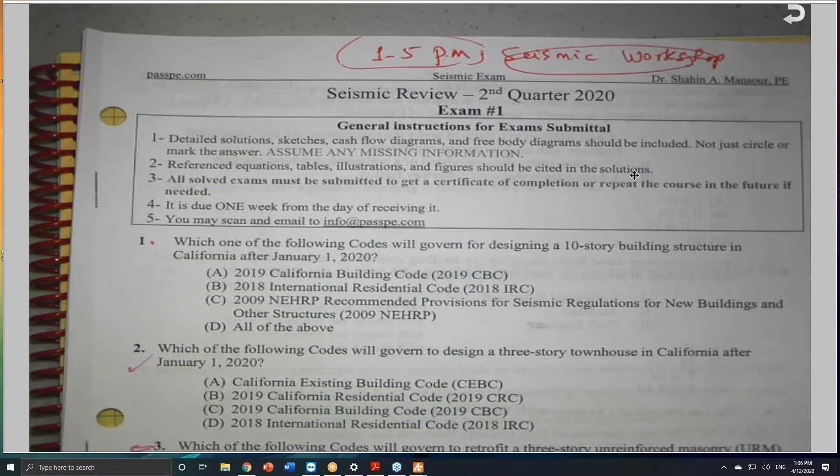So these questions are collected from my books. And as I mentioned last time, in order to get the maximum benefit for everybody, let me make sure that the system is working and all of you are here, especially the seismic group. I assume that all of you are here.

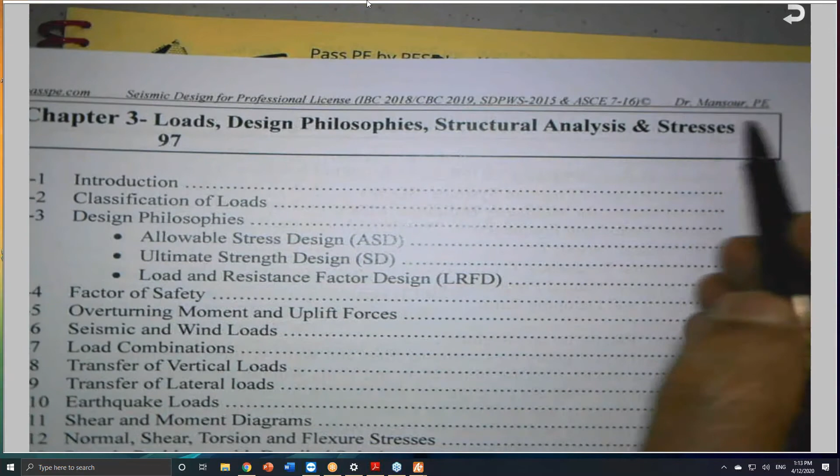Chapter 2, it's seismic legislation and the Professional Engineers Act. Chapter 3, things start to take a little bit toward the code or the seismic code. So we talked about loads, design philosophies, structure analysis and stresses.

Chapter 4, earthquakes, characteristics and basic theory. And chapter 5 is talking about some terms that we use a lot in seismic design and analysis. So I talked a little bit about the vibration theory, stiffness and rigidity. So the first 5 chapters, I call them introduction.

The heavy stuff starts from chapter 6, where we start to use a code, the ASCE 7-16 specifically, chapter 11 and chapter 12, these 2 chapters talking about seismic requirements for building structures. And after that, chapter 7, 8, 9, all the way until we hit chapter 16.

Because the current code, as you know, is the IBC, International Building Code 2018 / CBC 2019. CBC, California Building Code, came from, or is based on, IBC, the International Building Code. So either one of them. The difference between the CBC and IBC is that CBC has A chapters. For example, you'll find chapter 16 and 16A.

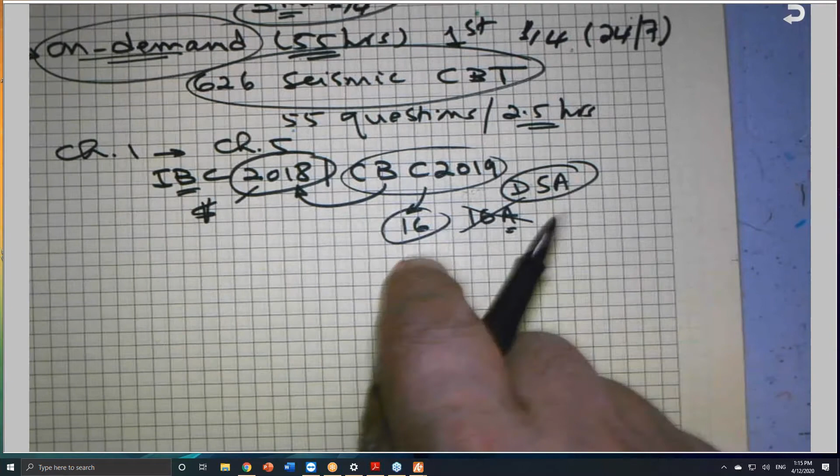and to avoid any confusion. In addition to these two codes, we have the major one, which is the ASCE 7-16. This is the core of the seismic, and you'll find the majority of the equations coming from this publication. It's a very thick document. In fact, it has 2 volumes this edition: the code itself, and after that, the commentary or the explanation of the code.

I'm sorry, probably I did something. Even though I did my best to secure it, it seems I hit something. Let me bring the camera back again, because it seems the camera is disconnected. Sorry for that. Let me try again one more time. Hopefully this time it will recognize the software. Now it should work. I hope so. Forgive me. Okay, here we go. Sorry for this technical difficulty.

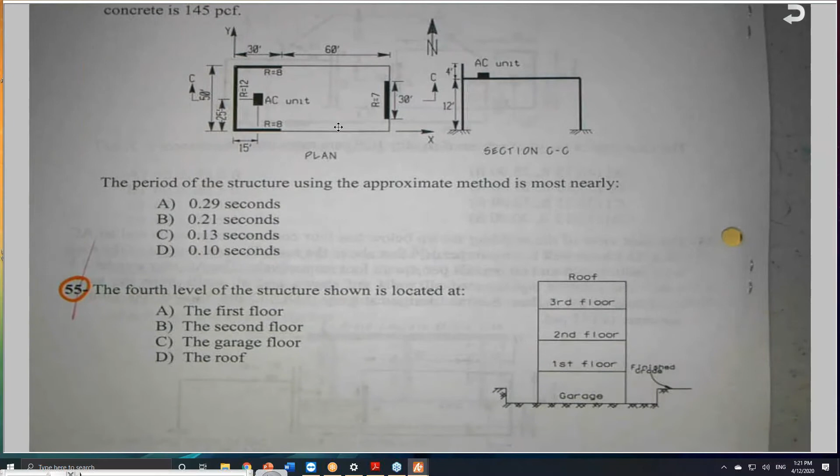So if we go to the 55 questions here, I will start with question number 55, and I'll go backward, because there are some problems at the end I need you to be aware of. Especially they need a lot of calculations, and I need you to be familiar with these calculations. After that, we'll go to the rest of the problems. As I announced last time, I hope you get a chance to watch the recording of chapters 1 through 5, so you can ask me any questions related to them.

So problem number 55 gives you a drawing like this, which I sent this morning, so I hope everybody got a chance to print it. The 4th level of the structure shown is located... In the code, there are 3 important definitions I need you to be aware of, listed in chapter 11 of the ASCE 7, and I include them in my book. What is a base, what is a level, and what is a story?

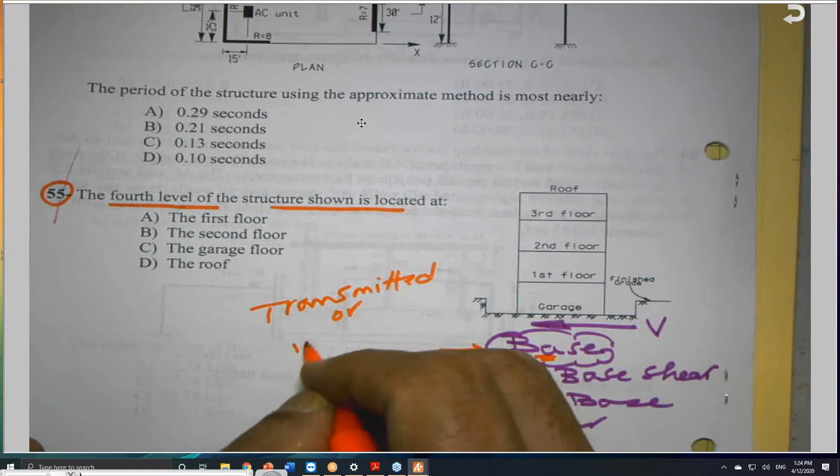So what is the definition of a base? Whether V will be coming from this direction or this direction is not the point. So the base is defined as the level at which the seismic force will be transmitted or imparted to the structure. Transmitted or imparted to the structure.

So, and this definition is given, I'll show it to you in just a minute. So it is the level at which the seismic force is imparted or transmitted. So when the ground starts to shake under this structure, a seismic force will be transmitted or imparted to it, and this in our case is going to be the base. But he's asking for the level. So

the definition for the base: this is where the seismic force is imparted to or transmitted to the structure. This is the definition of the base.

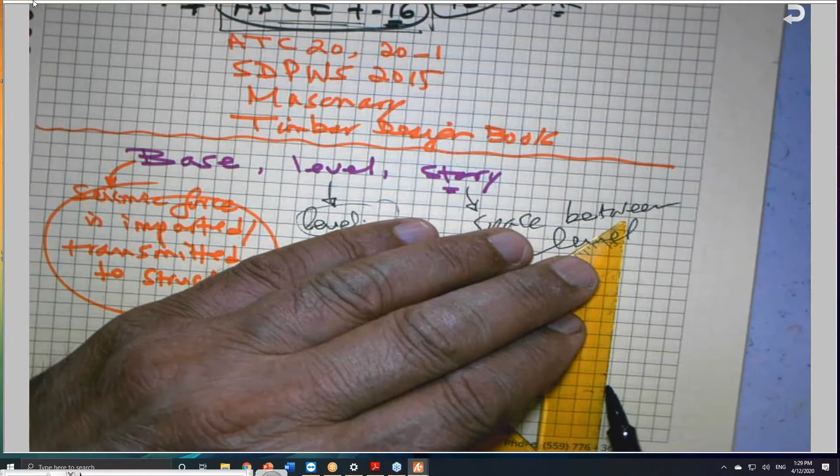So when we come to chapter 6 and talk about the distribution of the seismic force, assuming that this is a given structure, and the seismic base shear V has been determined, we know V is equal C sub S times W. C sub S is the seismic response coefficient, and we have some equations for that we'll see later on. And W is the seismic dead load.

So this V, we can distribute among the levels as F1, F2, and F3. This distribution is done according to an equation we are going to see. And these are the forces at level 1, level 2, and level 3. Obviously, this also has 3 stories: story 1, story 2, and story 3. And this is going to be the base.

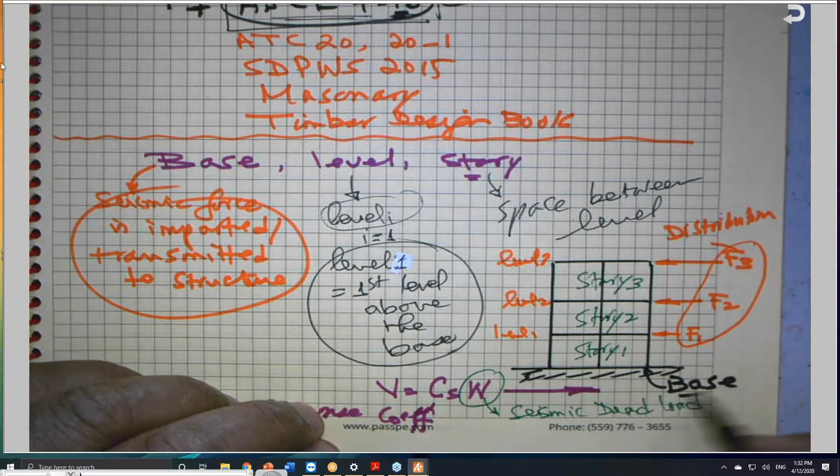So going back to problem 55, sorry, I'm trying to put in some information that we're going to talk about in depth later on. So the fourth level is the first floor, second, third, or the roof? Obviously, level 4, the fourth level, is the roof. And this is the answer here.

So this is the answer for this one here. At the beginning of my book, under glossary and definitions, on page 51 of the textbook, you will find all the definitions that I believe you need. I gathered these from different sources, including ASCE 7-16, chapter 11.

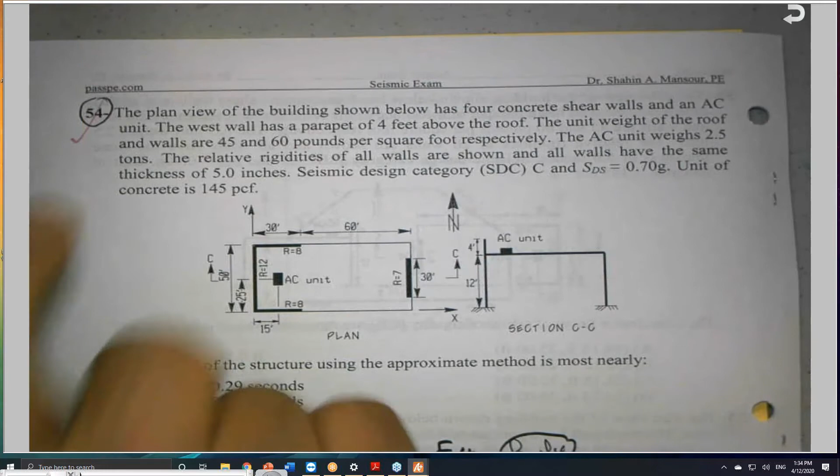The plan view of the building shown below has 4 concrete shear walls and an AC unit. This is a plan view, and this is a cross section, when you cut it, section CC. These are the walls, and we have an extension here. We call it a parapet. In chapter 7, we talked about non-structural components. So a parapet is a non-structural component.

So dimensions are given. The west wall has a parapet of 4 feet, which is an extension beyond the roof. And the parapet, as I told you, we classify as a non-structural component. We cover them in chapter 7 of my book, the textbook, which is based on chapter 13 of the ASCE 7.

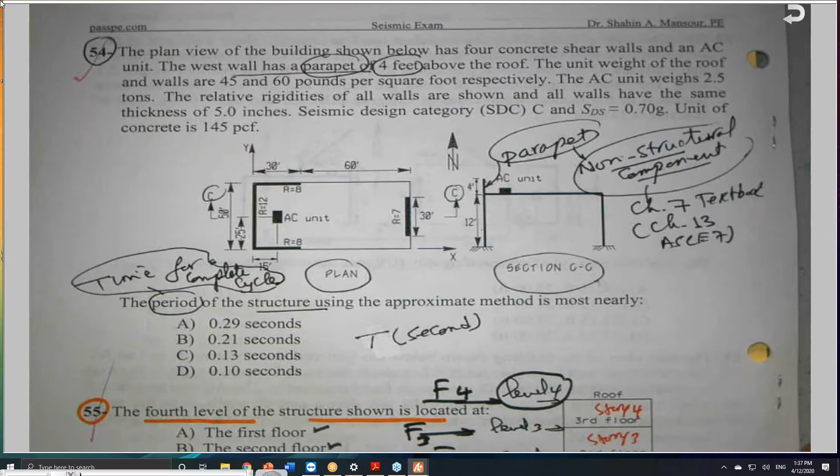T is the period, normally expressed in seconds. The period is defined as the time for a complete cycle of oscillation. So the period T is the time required for a complete cycle of oscillation.

We're going to see an equation in chapter 4. T is equal to 2 pi square root of W divided by K. W is this weight, W is equal to mg. Let me put it in terms of mass first. So it is mass over K, and I will define K in just a second. From W equals mg, the mass is equal to W divided by g. So the period T is equal to 2 pi square root of W divided by Kg.

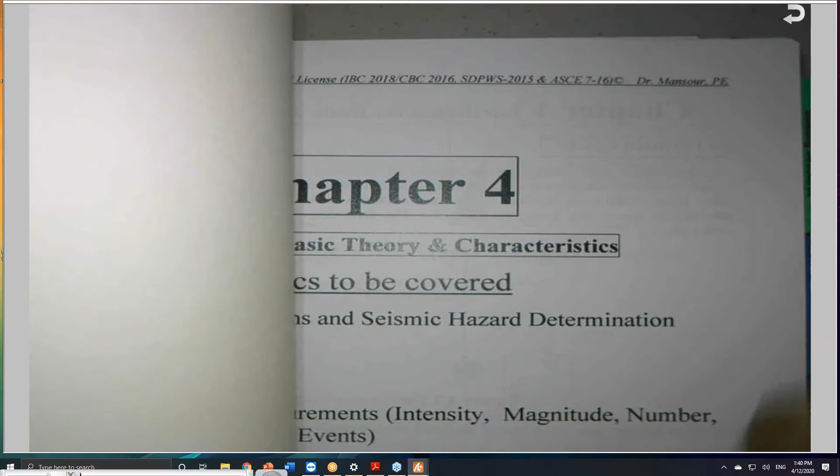If you have the book with you, in chapter 5 you will find this given. Here it is, equation 5-2. This is the natural period of the building, the time for a complete cycle of oscillation of a single degree of freedom system.

Two pi square root of W over g times K, or in terms of M, where M is the mass. g is the gravity acceleration, which is 32.2 feet per second squared, or 9.81 meters per second squared. I already gave these to you in the glossary and definitions. You will find g there as 9.81, or 9.80 if you like to call it that way.

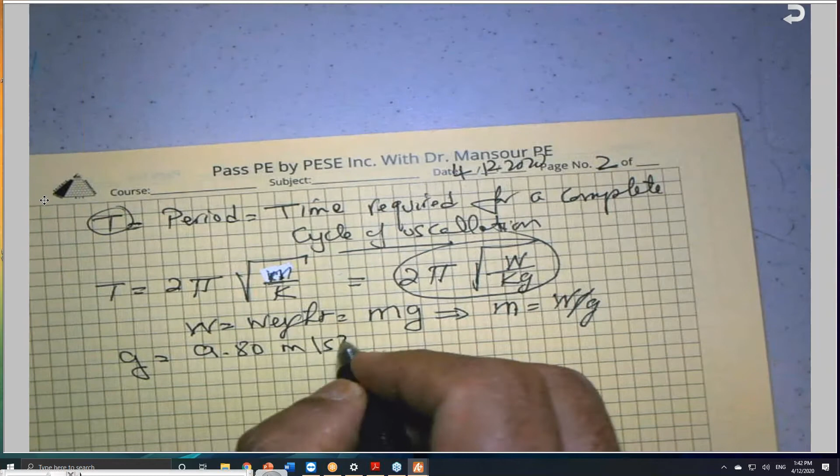1 meter equals 100 centimeters, so 9.81 gives you about 980 centimeters per second squared. The inches per second squared value comes from 32.2 times 12. So g is 9.80 meters per second squared, or 980 centimeters per second squared. We need this; in chapter 6 there are problems where g is required, 32.2 feet per second squared, or converted to inches, 32.2 times 12.

If you multiply 32.2 times 12, it will give you the number we just saw together, which is 386.4 inches per second squared.

So the period of the structure, T, is very important. So the T, and this is in physics, the period T is equal to 2 pi square root of M over K. K is stiffness.

Stiffness, by definition, is the force required to produce a unit displacement. A definition, K, and we remember this from school also, when we have the coil spring in physics, 4A or 4B or whatever the number, we determine the spring constant, we apply a force, P,

And here it is also in chapter 5. Leave chapter 5 open at the same location. But I need you to study it to a degree or to the level. Here it is, stiffness K. It is on page 149 of the textbook. Page 149.

And the g I just talked about, here it is 32.2 or 386.4 inch or 9.81 meter per second square. If you'd like to add here, it is 981 or 980, that depends how many decimal places, centimeter per second square. So you have all the units here. So the spring stiffness K is P over delta.

So I did not forget problem number 54 yet. I am looking for the period. But he said using the approximate method. At the beginning of chapter 6, we're going to see this. But let me just focus on one thing. This period here, as given in physics textbooks, is for a single degree of freedom system, which is normally how we model our structures.

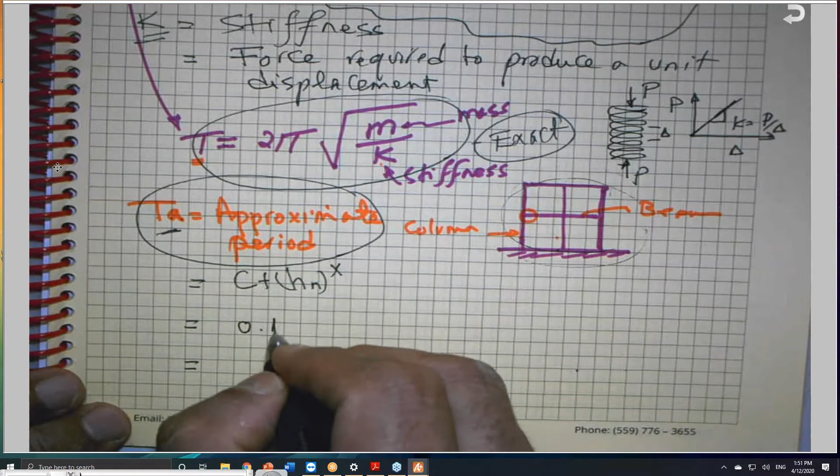After that, I can revise my design to get the preliminary sizes, to get the mass and the stiffness, and do this, the exact solution. And there is a relationship between T and T sub A. We're going to see it in chapter 6. So one of the equations is C sub T times h sub n to the power x. And one equation is 0.1 N, where N is the number of stories.

And in the first equation, C sub T is a certain coefficient. h sub n is the height of the structure to level n above the base. And for x and C sub T, they give us a table. This table is given in the code. And I took the table and developed some values for you to try to make it easy for you.

And this is 12.8-8. And the third equation is T sub A is equal to C sub Q, they introduced this the first time, over the square root of C sub W times H sub N. And they give us two values for C sub Q. C sub Q is equal to 0.0019 if we are dealing with feet, or C sub Q is equal to 0.00058 if we are dealing with SI units.

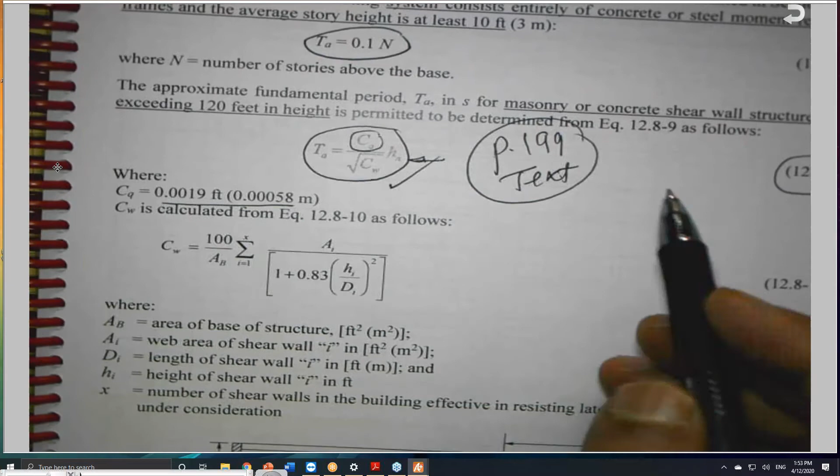And this is the little bit complicated equation, 12.8-9. And here are the values. And the C sub W is given by this equation. And I explain C sub W in the form of a diagram or a figure like this. And to the best of my knowledge, I am the only one who did that. Maybe somebody else has a book talking about this, because this is a little bit tricky. And I don't know if I have some problems.

I believe I have some problems to explain what these terminologies are, because it's not given in the code. I need to check the new code. I was thinking maybe in the commentary, since they came up with the new book, they have some kind of illustration. But I read a paper way back, and I got the idea from a paper, by the way. I did not invent it. I cannot claim that. It's just a matter of illustrating the concept of the equation itself.

So going back to the problem, we should know when we can use this equation, C sub T H sub n to the power x, when we can use 0.1 N, and when we can use this. Because there are certain requirements, and I will talk about it next time, okay? But this is just to solve the problem; next time in chapter 6, we are going to talk about this.

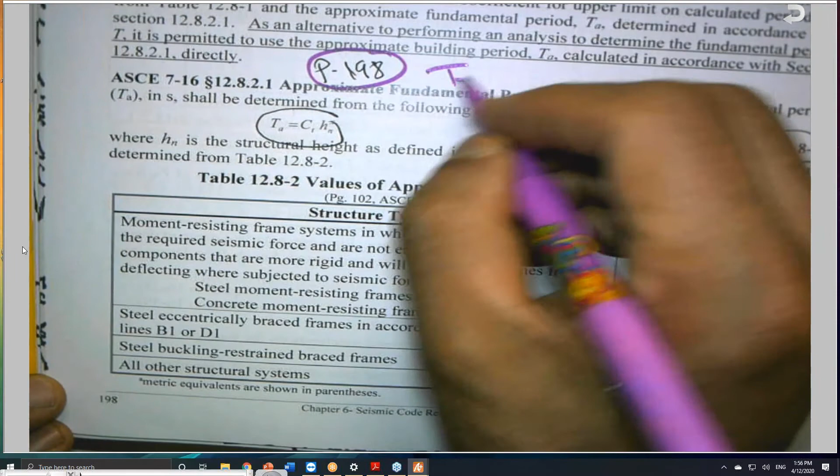So this is a bearing wall system, concrete shear walls. So when you go to the table that has the values of C sub T and X, as shown on page 198 of my textbook, you will find that we have one column for C sub T and one column for X. And for C sub T, you will find we have numbers here and numbers between parentheses like this. The numbers in the parentheses are the metric equivalents. And here are 4 entries, 1, 2, 3, and 4.

Here, moment resisting frame systems, which we don't have in our case. This is a bearing wall system. It's not a moment frame, it's not a building frame, it's not an eccentrically braced frame, it's not steel buckling restrained braced frames. It's under other structures. So it is this and this.

So in this case, if I plug in these numbers, where C sub T is 0.02, H sub n is 12 feet, and the X component is 0.75, and you do this calculation, you will get the period of the structure using the approximate method: 12 to the power 0.75 times 0.02. I got 0.1289 seconds, which I can approximate as 0.13 seconds. And this is why I will select answer C.

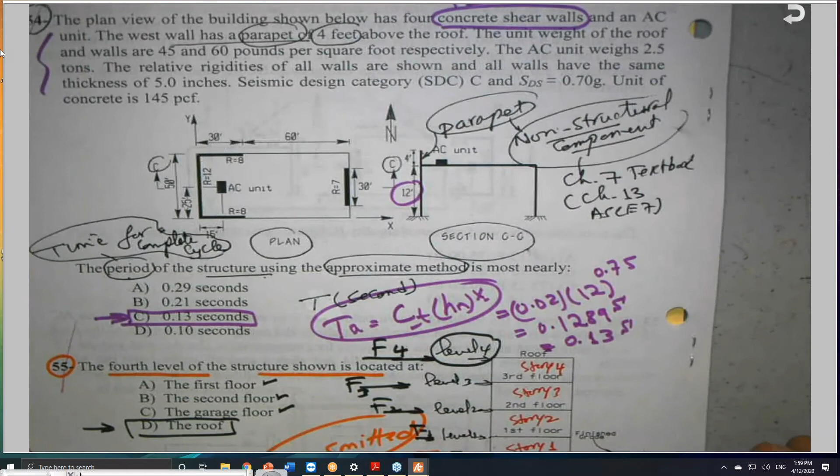Make sense? Good. I will be glad to scan these things and send them to you. I know my Egyptian handwriting. I don't know if you like it, but at least it gives you an idea of what I'm talking about. Okay, go to the previous page.

Problem number 53. The plan view of a building shown below has 4 concrete shear walls. So it is a bearing wall system, because as you know, in the seismic, we should know what system we are talking about, because we need to get the proper value of the R or C sub T, or so this is 3.

So we call it lateral force resisting system. A lateral force resisting system. Lateral force resisting system. And the lateral force resisting system, this is the system that is responsible to take the seismic force, which is the lateral force, to bring it down to the foundation of the structure.

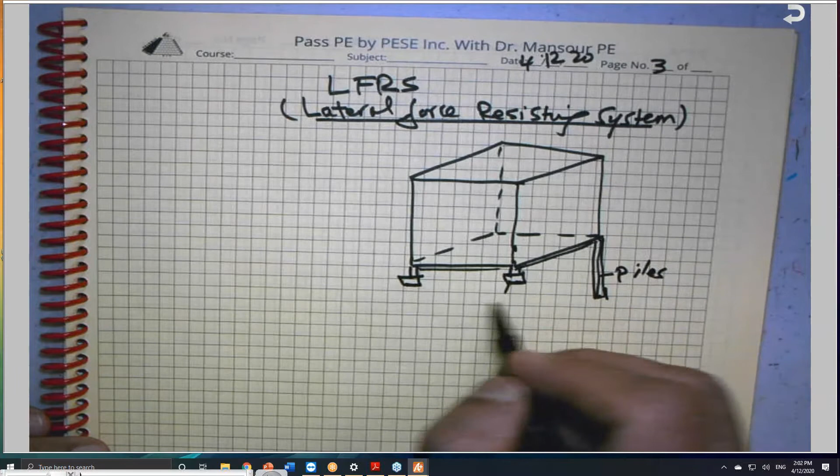This is a building or a structure in general. So I'm using a box like this. And there are some foundations here. Maybe it could be footings or maybe piles. It depends on the height of the building. This could be very long or could be just a footing, whatever the number of stories of this structure.

So basically, there is a seismic force. And this is a lateral force. We are going to see it later on, by the way, in chapter 9 and chapter 10. And you are going to see a problem just shortly about this, by the way. A lateral force at each level. It could be a distributed load or a concentrated load. Chapter 9 and 10, you will find a drawing like this. Maybe I need to get this seismic force, which is a lateral force. These are the seismic lateral force.

I needed to get it from its point of application all the way to go through the roof, for example, which we call it diaphragm. Take it all the way down, until it comes to the footings or the foundation in general, and go to the supporting soil. This is why we need to know the type of the soil very well.

This is why they came up with the soil type A, and soil type B, and soil type C, and soil type D, and D default right now. They have 2 Ds. D based on testing, and D by default. If we assume it to be D, the code has a little bit of special requirement this time. And E and F. Those are the 6 types. A, B, C, D, E, F. A being the best soil. This is the best, which is hard rock. This is the best. And this is the worst soil.

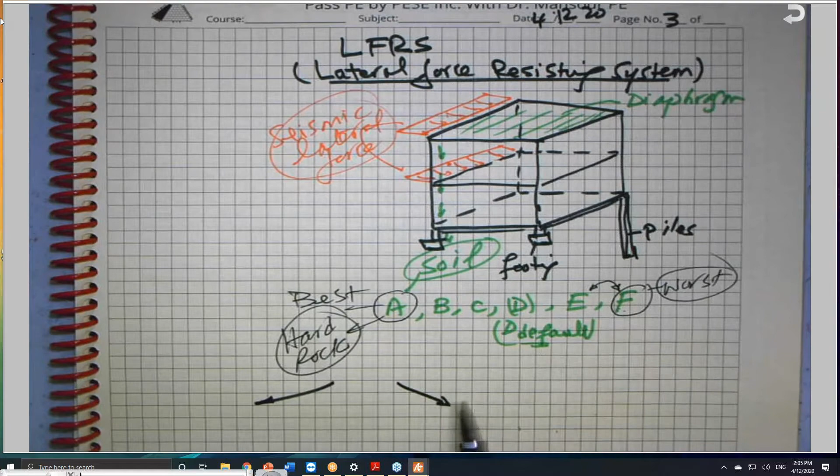lateral force resisting system. So the lateral force resisting system, in order to help us, they came up with a very nice way to describe this, and they broke it down, or I broke it down according to them, according to the current code: a bearing wall system. Wall systems, let us make it plural. So it means that the walls are responsible to carry the gravity load and the lateral load, because here we have a gravity load, by the way.

We have load coming down, which is the gravity load, but we don't design for it. We are not concerned about the gravity load in this course. So we have a gravity load and we have a lateral force or lateral load. We are concerned about this here, which is the earthquake force, not the wind load. The E is the earthquake force. Earthquake lateral force.

So the first one is a bearing wall system, or the bearing wall systems. The second one is building frame systems. Frame systems. And the following one is the moment frames. Moment frames.

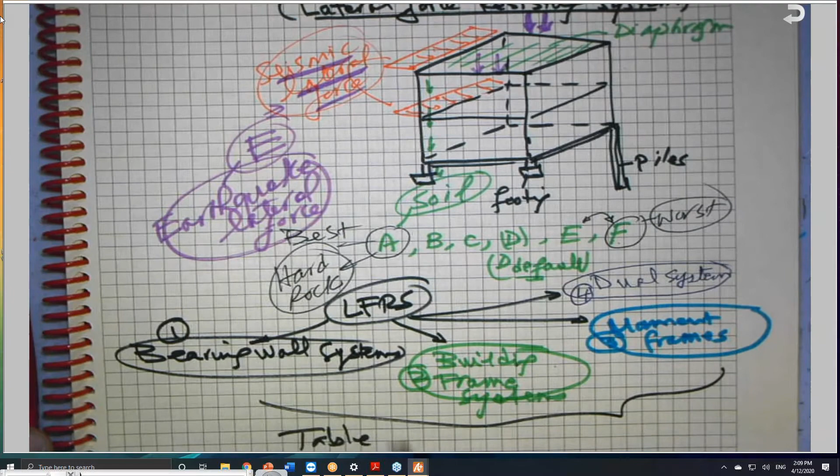Here you will find there is a table in the ASCE, table 12.2-1. This is the largest or the biggest table. It has all these systems, and they broke it down into subsystems, about 83 systems, if I count them correctly, I believe. But you have it and you can count them. Let me know if it's 83 systems.

And on the exam, you need to know exactly which system they are talking about, because there are some values we are going to get from this table. We can get the R, we can get the omega sub O, and we can get what is known as the C sub D, deflection amplification factor, and R, the response modification coefficient, and omega sub O.

Let me see, I forgot. Over strength factor, what it is. Forgive me, team. I didn't sleep very well last night.

So this is the over strength factor, this is the deflection amplification factor, and the R, response modification coefficient.

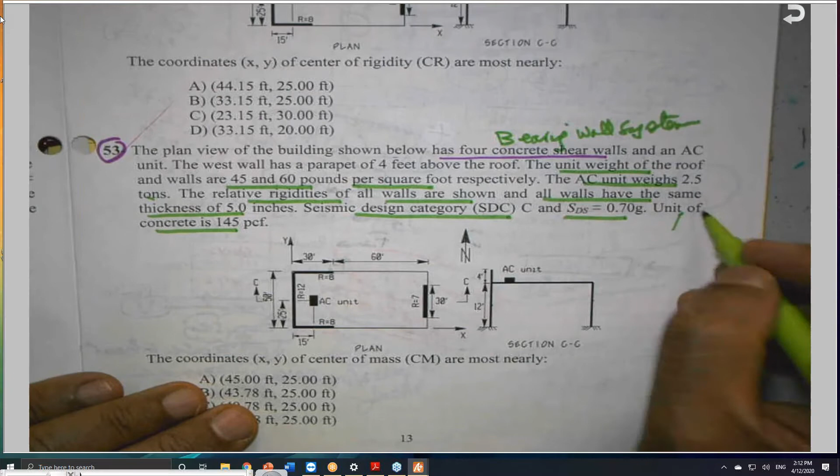The unit weights of the roof are given to be 45 and 60 pounds per square foot. And the AC unit is 2.5 tons. We have an AC unit here. The relative rigidity of all walls is shown. And all walls have the same thickness, which is 5 inches. The seismic design category is C, and the SDS is 0.7 G. And the unit weight of concrete, which is gamma concrete.

And the question is, what are the X and Y coordinates of the center of mass of this building? We have coordinate system X and Y. So this is the origin here. This is O. He has to give you the reference. So he's asking where the center of mass is. This is a plan view. The center of mass is somewhere here. CM.

He's asking for this dimension from here to here, which we'll call YCM, and this distance from here to here, which is XCM. And we need to know the center of mass, because this is where the seismic force will go through. The base shear V goes through the center of mass.

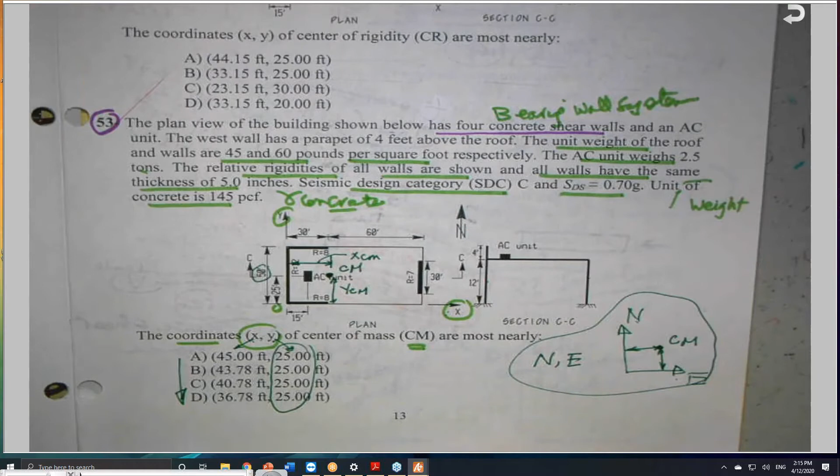Sometimes they use the northern and the eastern. So he will tell you, okay, this is the northern direction, and this is the eastern direction, and the center of mass will be somewhere here for whatever structure it is. So he can give you the coordinates of the center of mass based on the northern and the eastern. Here he put it as x and y because he gave me x and y. So pay attention. Also, I saw some problems that could be this way, where I used the northern and the eastern also. Yes, I used it.

So we need to determine the CM, the center of mass. Where is center of mass? I cannot really, by the process of elimination, eliminate any of these because all of them are 25, 25, 25, 25. That means that he is forcing me to calculate the value of x sub CM, x of the center of mass. If I'm able to get x, for sure I will pick the right answer.

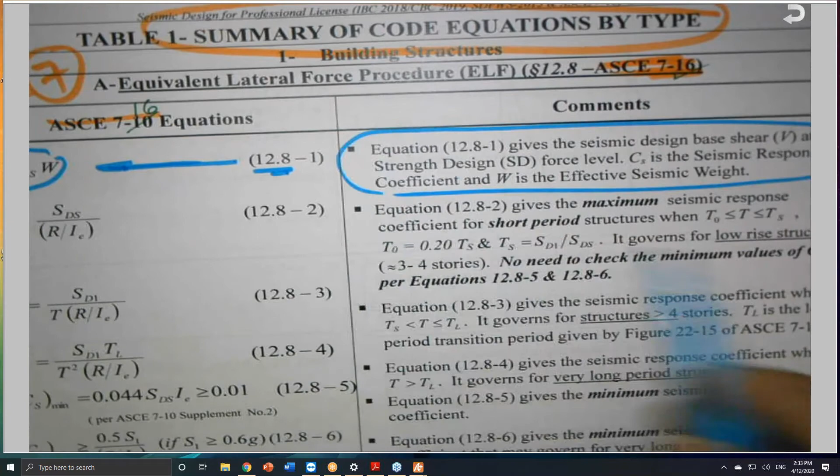And this summary is broken down into code equations and non-code equations. So on page 7, for example, of this summary of code equations, like the equation I wrote today that V is equal to C sub S times W, I give the name of the equation, when can we use it, and what are the parameters needed for this equation, and so on.

And after I finished the summary of the code equations, I constructed another table, which I call table 2 on page 13, summary of non-code equations. For example, the center of mass and the center of rigidity are among those non-code equations because they are expecting that we will know how to determine that. Here it is, equation 22 and equation 23 for the center of mass and the center of rigidity.

So nobody will ask you to memorize equations, but we need to know where they are located, when we can use them, and what are the parameters. So I have XCR and YCR for the center of rigidity, and XCM, the one we are going to use right now, and YCM. In our case, YCM by inspection is 25 feet due to symmetry. And I will explain this one more time. So these are the equations that I need you to be aware of, where they are located and how we can use them. So what is the story of the center of mass and the center of rigidity?

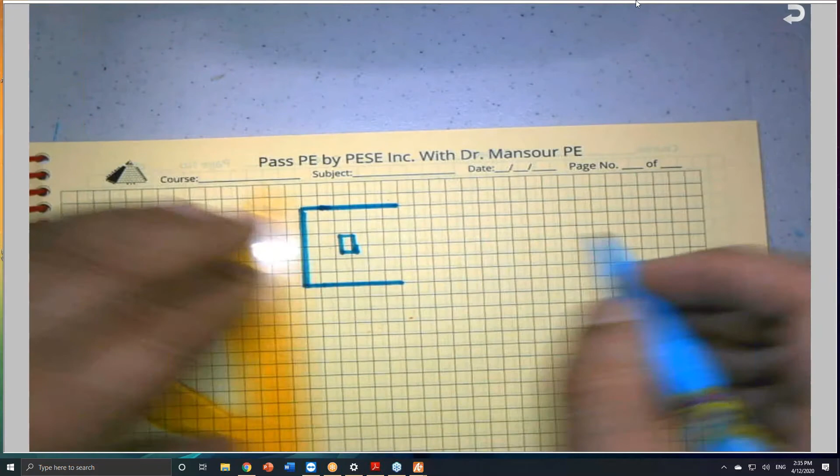Center of mass and center of rigidity are extremely important as far as their location or determination, because if you look at any building, a plan view like our building for the sample problem here, you will find that we have a wall here, and there is another wall here. Let me make it a little bit bigger. And we have another wall here. And we have the AC unit here. And we have another wall here, which is a short wall.

And the rest are openings. And this is what you see here, but I drew it a little bit bigger. So I said that the center of mass is somewhere here. And we defined that this is X and this is Y. And this dimension is 50 feet. So due to symmetry, the center of mass is halfway of the 50 feet.

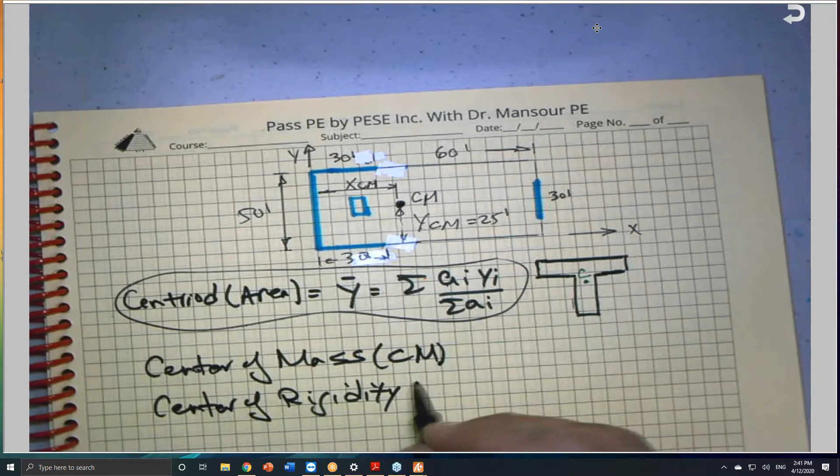So the centroid, with the centroidal axis, C. What we did, we took the same equation to calculate the center of mass location, CM, and the center of rigidity, CR. Center of mass and center of rigidity, these two based on this equation.

But when we're talking about area, we use A. When we determine center of mass, we are using M. When we calculate center of rigidity, we are using R. So for this problem here, the XCM, based on the equation I showed to you, which is equation number 23, XCM, in parallel to this, is the sum of the Mi Xi over the sum of the Mi.

And this is equation 23. Obviously, I give it a number because there is no equivalent equation in the code. So this is equation number 23 on page 16 of the textbook. So far, so good. Let us do the math. And I'm sure that you are going to have some questions after we finish, but this is the purpose of this exercise.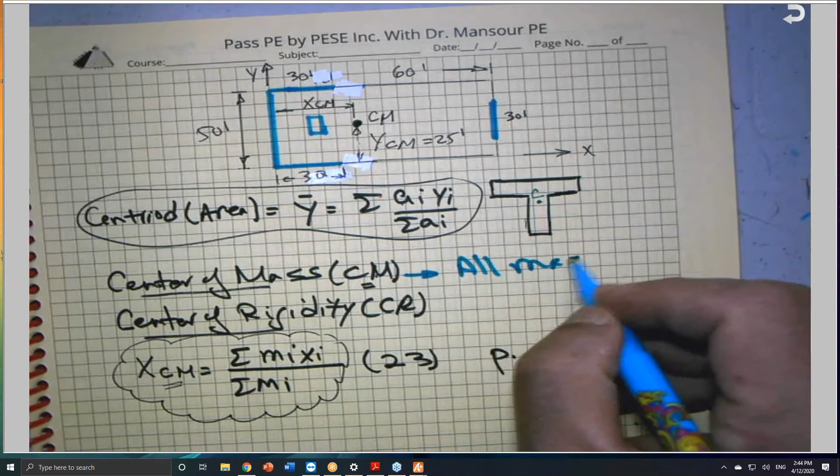The biggest problem with the center of mass calculations, you may forget one of the masses. You may. But when we calculate the center of mass, if you remember the 7 rules in chapter 7 and chapter 5, all masses should be used to determine the location of center of mass. But the center of rigidity, no. Not all the walls, as we are going to see shortly. Certain walls, not all the walls, will be part of the center of rigidity calculations. Sometimes in certain configurations, all walls, but not necessarily. But this is a rule, always.

So what do we have? We have the roof. So I will take each mass multiplied by its distance, where xi is the distance from the centroid of the element to the y-axis. So the first one is, let me put it here. In a problem like that, I know it is very lengthy, and I don't know if they can ask you this or not on the exam. Maybe a little bit more simplified one, but I will count them.

The roof is one mass. I have walls: 1, 2, 3, 4. I have 4 walls. I have the AC unit. So a total of 1 plus 4 is 5, and the AC is 6. So 6 components must be shown here. If I miss one, that means that I did something wrong. Are you ready? Let's start with the roof.

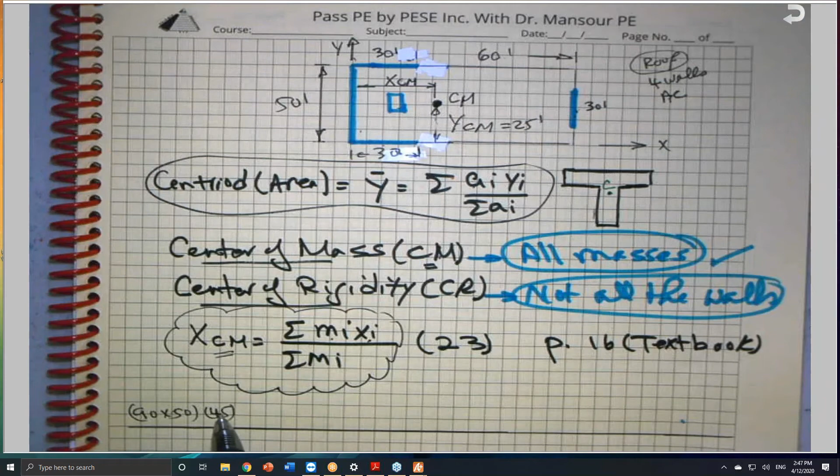The roof is 90 by 50. This is the surface area. It is 90 by 50. How thick is the roof? He gives the roof directly. The roof has a weight of 45 pounds per square foot. So 90 by 50 gives you the surface area, times the unit weight. This is the mass by itself.

But the roof has a centroid, and this is 90. So the centroid of the roof is halfway, which is 45 and 45. So I will multiply this. This is the xi, which is 45 feet.

So far, so good. A plus. So I finished 1 out of 7. Out of 6, sorry. I will take this wall. This wall, it does have a 30 feet wide. And this is also, I can make 50 feet times. The height is 12 feet. So this is the surface area. Times the unit weight for the wall, which is 60 pounds per square foot. How far from the centroid of the wall to my reference axis here is 90 feet.

I finished wall number 1. So I would say plus. And the roof, plus. A plus. For 1 wall. These 2 walls are symmetrical, by the way, or they are the same. I can say 2 walls times 30 feet times 12 feet times 60. How far from the centroid of this wall to this here is 15 feet. And I multiplied by 2. That means that I have 1 and 2 walls here. So this wall is done and this wall is done.

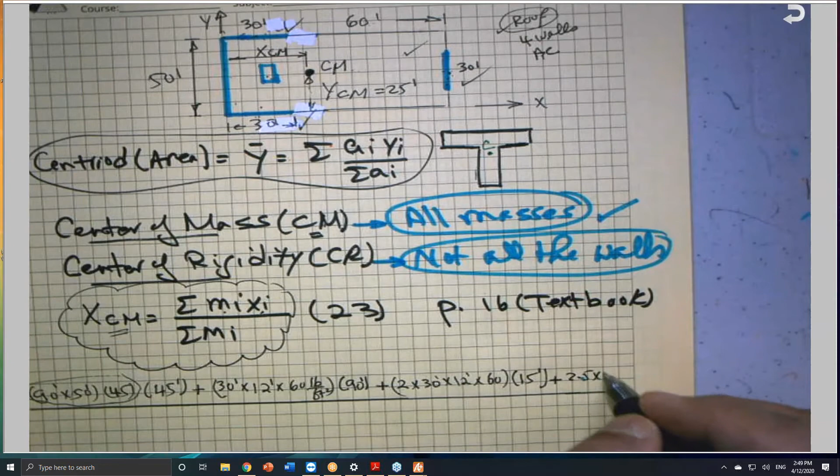I will hit the AC unit. It is 2.5 tons. So it is 2.5 times 2,000 pounds per ton, times the distance from the centroid of the AC to the y-axis, which is given as 15 feet. So I am done with the AC.

I put the numerator. You can add the denominator immediately, by the way, because the denominator is a mass. So you can say this is 90 times 50 times 45. This is mass number 1, a plus. I have 30 times 12 times 60. A plus. 2 walls, 30 times 12 times 60. A plus. 2.5 tons times 2,000 pounds per ton.

1 wall to go, which is this wall here, which is 50 feet. Sorry, the numerator here, I will continue like this. So I will say a plus here. It is 50 feet times, the height here is 16 because of the parapet, times the unit weight, which is 45. Sorry, no, 60. The 45 was for the roof. So 60. Which is this one here. Multiplied by how much? Multiplied by 0. But don't forget to put it in the denominator. Even multiplied by 0, but still by 60.

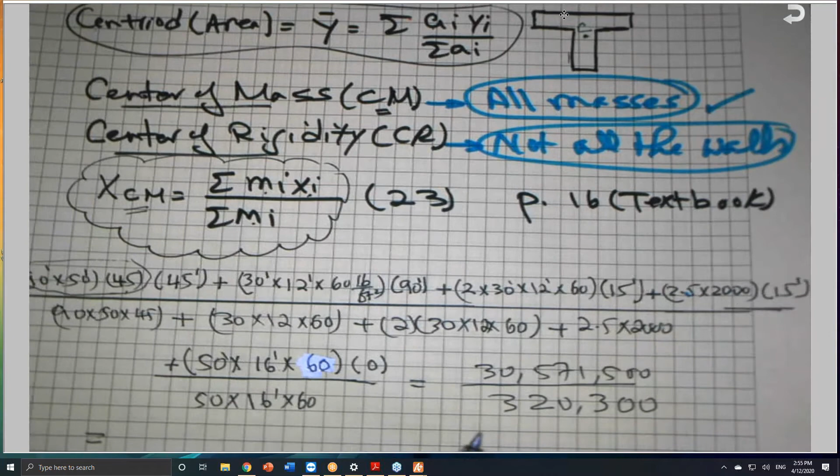Okay. I have the solution. I can show it to you, but I wanted to do it with you. This number most likely is wrong. Let me do it one more time.

I get this number here, 11,779,500. So if you do this, divided by 320,300, I got 36.78 feet. I hope that you agree with me. Anybody got the same number? 36? I need either yes or no. Anybody can support me or correct me, unless you are doing the calculations.

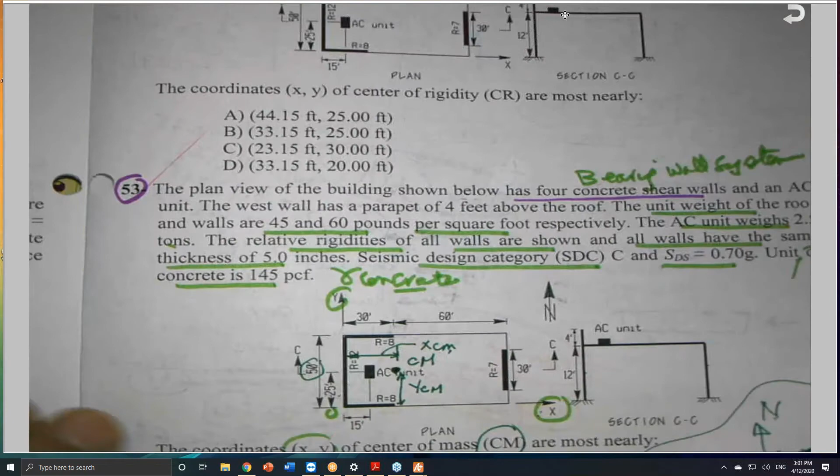So the center of mass, and I have many problems, you will find that the mistakes that we might make, we probably don't do the math right. I did the first one, a number came out that does not make any sense. And after that, I did it again, and it turned out to be correct. Don't forget that some members will be multiplied by 0. Don't forget to count the number of elements. Don't forget that all the masses will be part of it. Make sense?

Okay, so this is problem number 53. Sorry, it took long, but at least we understand. And if you have a center of mass calculation, try to be careful with the common mistakes, as I told you, that we make: forgetting one of the walls, doing the math, not taking the right density or the right unit weight. And as I told you, if you go to page 626, problem number 22, you will find a problem similar to this.

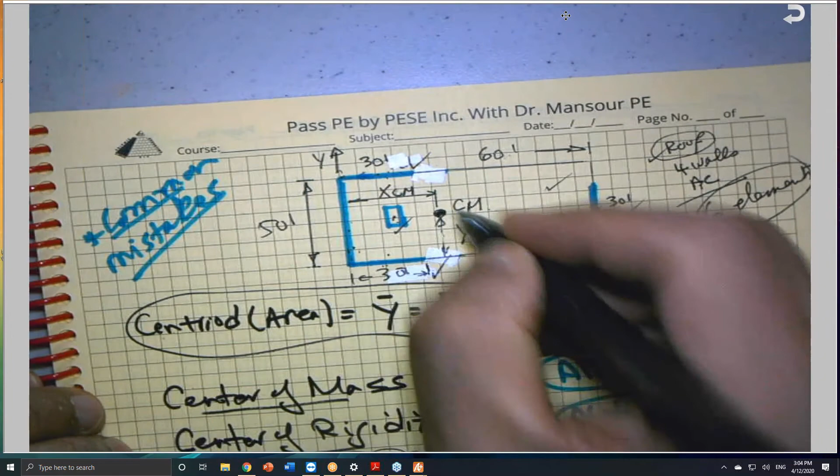Before I leave the center of mass, as you can see, the distance 36.78, the one we got, here it is. This is the distance. The whole distance is 90 feet, as you can see from here. The center of mass is closer to the concentration of the mass. The distance from here to here is only 36.78, more than 1/3 of the entire distance, because we have an AC unit here, we have walls here, but we have an individual wall far away from the concentration of the mass. This is why the center of mass is closer to the concentration of the mass.

This is also true for the centroid of an area. When I covered this, I explained that if the area is changed, this is the flange, and this is the web. If the area of the flange increases, the centroid will move up. It will get closer to the concentration of the area. And this is true for the concentration of the mass and the concentration of the rigidities.

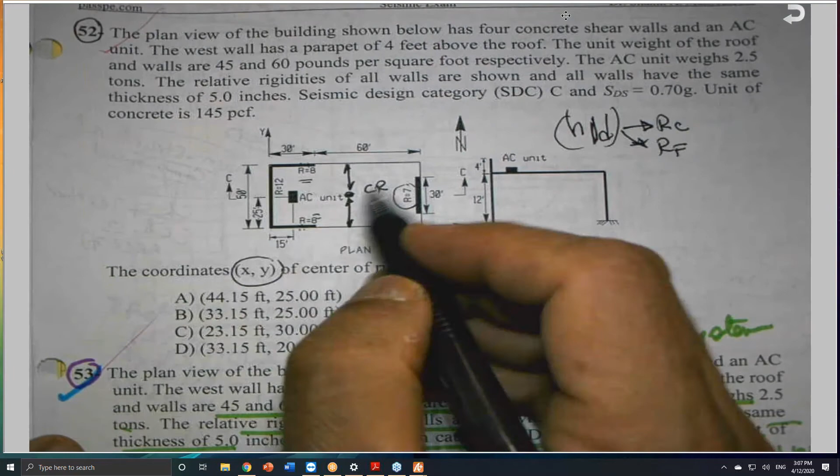So due to symmetry, I'm expecting the center of rigidity, CR, to be halfway between this wall and this wall, because the center of rigidity moves up and down in relation to the relative rigidity of these two walls only, and moves right or left in relation to the rigidity of this wall and this wall. In fact, it will be closer to this wall than this wall. So for sure, YCR must be 25 feet, which is half of this. So I can get rid of this. Here he is nice. This is because of the symmetry. Always look for symmetrical situations.

So what I need right now is the X center of rigidity. And this is very easy, one simple equation. I will sum moments about Y, or I can say XCR is equal to what? Here, not all the walls. For center of mass, we use all the walls and the AC. Here, only certain walls, this wall and this wall. The other walls will not participate in determining the center of rigidity location in the X direction. So this is 12 times 0, because I'm summing moments here, divided by 12, because the center of rigidity is the sum of Ri xi divided by the sum of Ri. I replace the letter A for area with mass, or with R if I'm talking about rigidity.

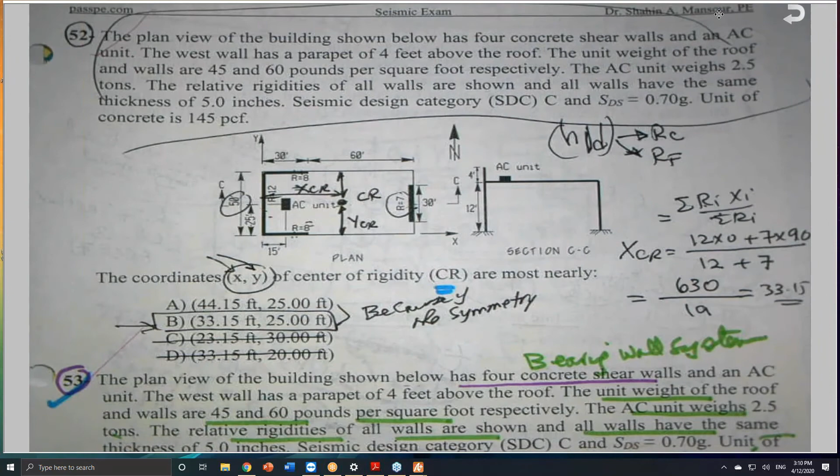Bingo, here it is. The answer is B. So on the exam, if you are getting close, you have only 1 minute left, and you have a situation like this, and he gives you lengthy information and is asking about the coordinates. Sometimes they ask only for one coordinate, by the way. Sometimes they ask for two coordinates. Be careful what they are asking for. They might ask for one coordinate, and sometimes they ask for two coordinates.

So by the process of elimination, I can eliminate answers C and D, as I told you, due to symmetry. Please remember this word, symmetry. Let me write it down here, so when you get my notes, symmetry. For the center of mass and the center of rigidity, if there is any symmetrical certain number of walls, I try to get the benefit of this property. So I have two answers left. Both of them are 25, because I know it's 25. And I have 44.15 and 33.15.

And you have only 30 seconds or 1 minute, and this calculation shouldn't take more than a minute or so, assuming that you remember the equation. And where is the equation? But at least you are 50-50, or you can proportion 12 with respect to 7. Okay, so this is the way also we do it, 12 over 19, in fact, and 90 times, but you need the opposite one, so it is 90 minus. Yeah, I got 33.15. So you can proportion that.

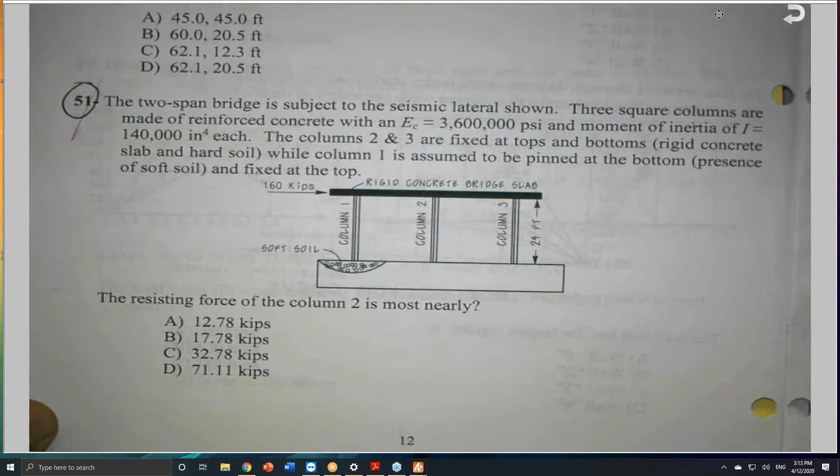Number 51. Let me give you a chance to read it. Give you 2 minutes.

And I will do all my best in the future to send you the problems early. I'm really, really busy, but I'm doing all my best. I will do all my best to send it as early as I can, because I needed to sit 2.5 hours and work all these problems. Even if you know the solution is given somewhere, I will do it on my own. I will solve these problems as if it's the first time I see it.

Let me give you, each problem is 2.67 minutes or 2.7 minutes. Let me round it. Because they give you 55 questions in 2.5 hours, and this is the biggest problem. So it is 150 divided by 55 is 2.7. I was wrong here. 2.72. 3 minutes. Let me give you 3 minutes from now. So 3:14, so 3:17.

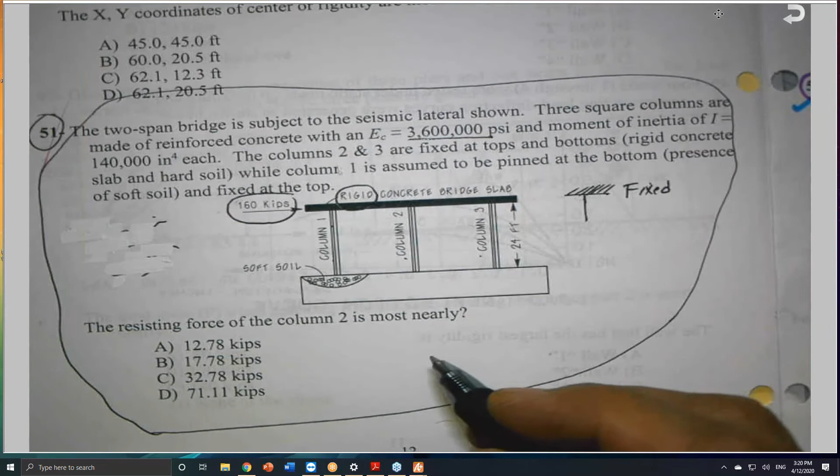So the moment that you see in a problem statement that the connection between the slab or the roof and the wall or the vertical column, whatever system is given, is rigid, immediately I will think about this as fixed. He said that 3 columns are shown, made of concrete, and the modulus of elasticity is given, E sub C. Concrete, as you know, the modulus of elasticity for concrete E sub C is about between 2 to 4 or 5 million psi.

This is different from E steel. The modulus of elasticity for steel, E steel, is E. This is modulus of elasticity, not the earthquake force. E steel, we are using letter E also, is 29 million psi, as you know, or 200 GPa. This is, by the way, one number for all kinds of steel. The concrete modulus of elasticity E is not constant like steel. It varies between maybe 2 to 4 or even 5 million psi, because it depends on the strength of the concrete.

And he will give it to you. Normally, such a property must be given to you. So he gave it to you here as 3.6 million psi. The moment of inertia is given, I. Columns 2 and 3 are fixed top and bottom. Here it is, rigid concrete. So this column is fixed top and fixed bottom. This is fixed top and bottom.

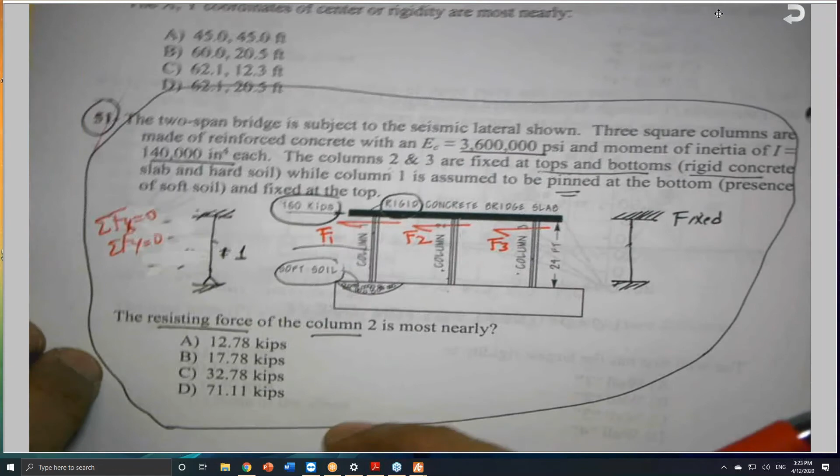So how can we get F1, F2, F3? So let me write it down here. F1 is equal to this force here, which I will call P, or call it F. If you like to call it F, I have no problem. Here F is the total seismic lateral force, times, I will call the stiffness for this one K1, this one K2, and this one K3, times K1 divided by K1 plus K2 plus K3.

Why am I adding them? Because this is a parallel system. Do you remember the parallel system? So these three columns are a parallel system, where the K total, or K equivalent as we call it, is equal to what? It is equal to K1 plus K2 plus K3. And here it is. So this is the K total or K equivalent.

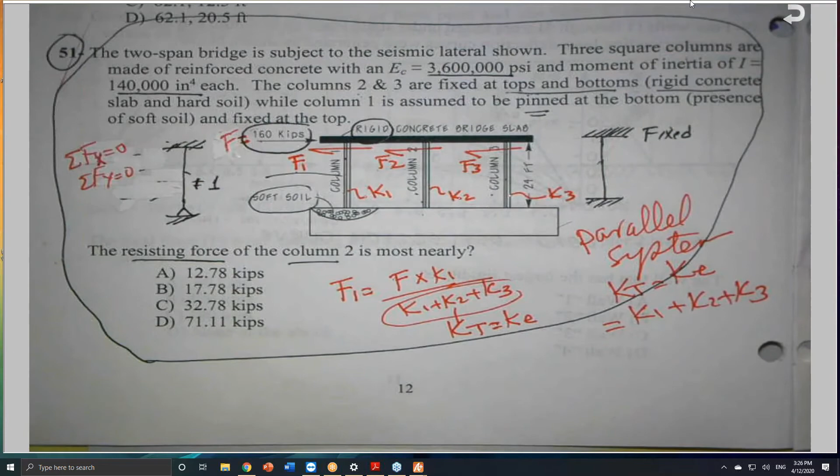So far so good. How can we get K1, K2 and K3? Again, this goes to chapter 5. At the end of chapter 5, there is a table that shows the stiffness for different end conditions. Let me bring the book here, and all of you know which table I'm talking about at the end of chapter 5. And you promised me that all these pages will be stored in your brain. This is the table I'm referring to, which we used before to solve a problem, before the tables of the H over D ratio. This is table 5-3 on page 154.

And this table gives you the stiffnesses and the deflection from structural analysis. Nobody will ask you to derive these equations. For stiffness, if the column is fixed-fixed, we use 12 EI over H cubed. If the column is fixed-hinged, we use 3 EI over H cubed. If the column is fixed-free, we use 3 EI over H cubed. And the other one, which is the braced system, I included also.

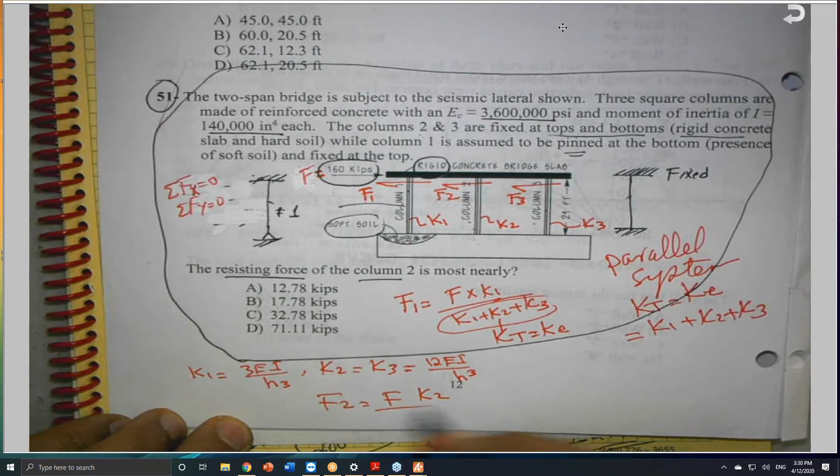So basically, I can say that I need F2. So F2 is equal the total force times K2 divided by the K total, which is K1 plus K2 plus K3. So here it is. I can put it. Okay, so this is 160 kips. I don't have to calculate, by the way. K2 is equal what? Is equal to 12 EI over H cubed divided by K1 plus K2 plus K3.

So it is 3 EI over H cubed plus 12 EI over H cubed plus another 12 EI over H cubed. You don't have to substitute for the numbers because the numbers are getting really big. They give you the numbers just, okay. But I can factor EI over H cubed out, and this will cancel. So it is 12, here 12, and the 3, and 12, and 12. Unless I did something here different, no, it's still the same.

So in this case, it is 160 times 12 divided by 3 plus 12 and 12, so it's 27. And this number hopefully is among the 4 answers. So it is 160. Did I do something wrong here? No, that's correct. 12, 27 divided. I got 71.1 kips. And this is the answer D.

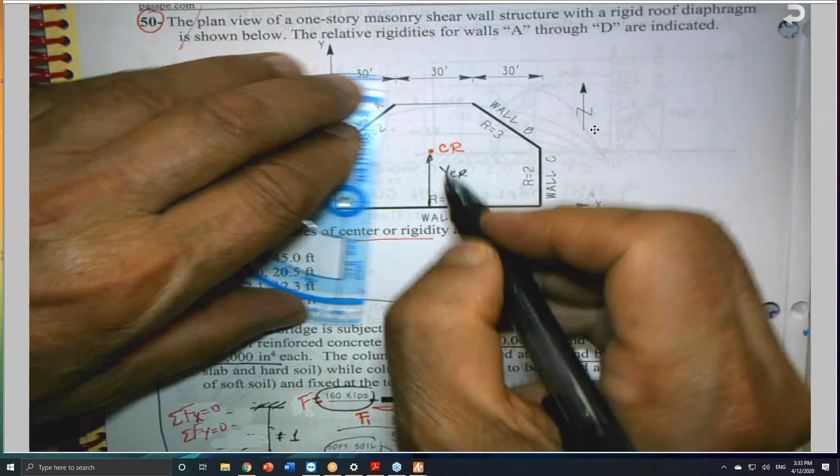Okay. Any question about problem number 51? Problem number 50. This is asking for the X and Y coordinates for the center of rigidity. The center of rigidity is somewhere here. And again, he is asking for two coordinates, the X and Y. This is YCR, and from here to here is the XCR.

Here we have two walls, A and B. They are not perpendicular walls. This is a non-parallel system. The problem that was solved before was a parallel system; center of mass and center of rigidity was straightforward. Here, in calculating the center of mass and the center of rigidity, be careful, these two walls are going to be contributing to both directions because they are not a parallel system. But this wall here will only contribute in the Y direction only.

And that's why I needed to review the 7 rules again. They are given in chapter 5, and I put them in my book in chapter 5 also, just immediately before the table we were looking for. Here we go. The 7 rules. This is on page 153, by the way. The 7 rules at a glance.

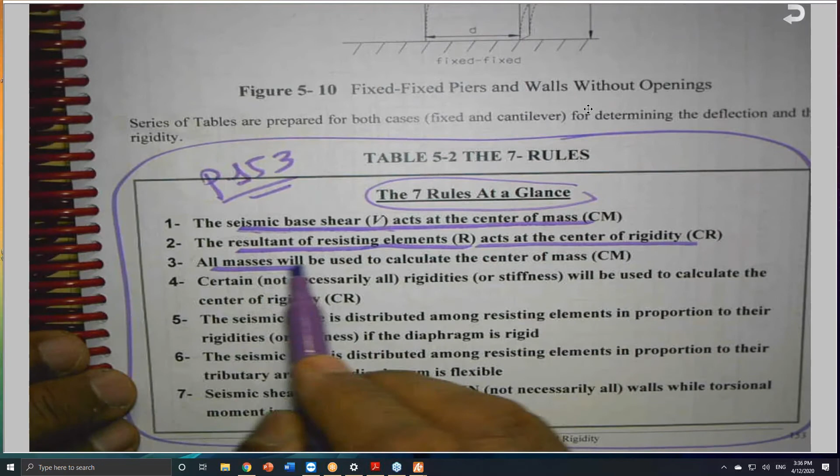The seismic base shear acts at the center of mass always. The resultant of the resisting elements R acts at the center of rigidity. And all masses will be used to calculate the center of mass. Do you remember? We use all masses, all walls and the roof and the AC unit, all masses that are part of the building are going to be contributing to the equation.

Here, certain, not necessarily all rigidities or stiffness will be used to calculate the center of rigidity. I need you to be aware of that. This is rule number 4. And rule number 5, the seismic force is distributed among the resisting elements in proportion to their rigidities or stiffness if the diaphragm is rigid, exactly like what we did here. For problem number 51, the seismic force is distributed among these vertical columns in proportion to their stiffnesses.

And again, remember, don't put in the big numbers that they give you. Oh, sorry. So review the 7 rules here, please, from time to time. And number 6, the seismic force is distributed among the resisting elements in proportion to their tributary area if the diaphragm is flexible.

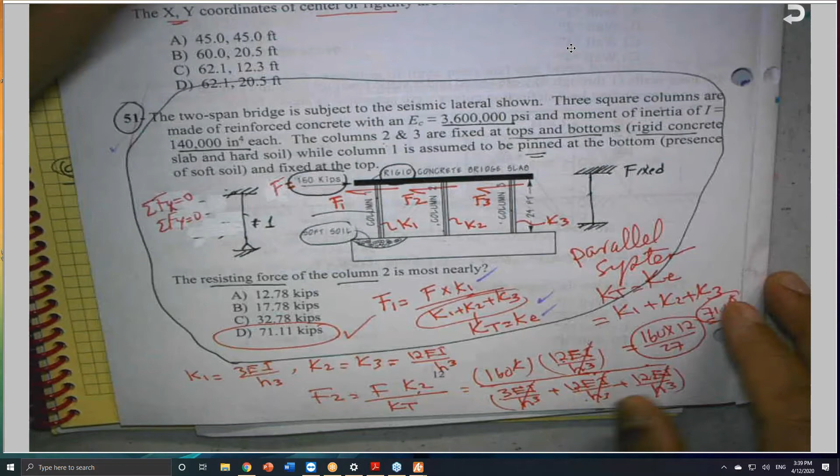So the torsional moment is resisted by all walls, but the direct shear, no. Direct shear is not necessarily resisted by all walls; it's resisted only by the parallel wall system. If they are a parallel wall system, certain walls, not necessarily all walls.

So if you look at this non-parallel system here, we need to determine the center of mass and the center of rigidity. The center of rigidity only. The coordinates of the center of rigidity. I believe this is an extra "or" here, I don't know what this is. The coordinates of the center of rigidity. Sorry, here it is, typo.

Let me give you 3 minutes and do it. I'm sure that you can do it, because I already talked a lot about the center of mass and the center of rigidity. You have the equations, equation 22 and 23. And be careful because we have a slanted wall here and a slanted wall here, or non-parallel walls. So we have to consider these walls when we calculate the center of rigidity. So 3 minutes from now. It's 3:41, 3:44.

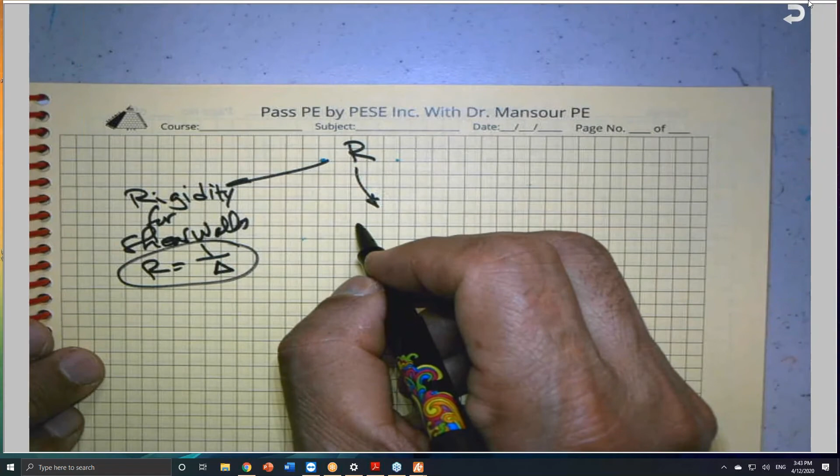Okay. And he gave you the relative rigidities for each wall. As I told you, the R is used 3 times in this code. The R we use as R for rigidity for shear walls, and R is equal to 1 over deflection, by the way. The second R is the one I was talking about in table 12.2-1, which is the response modification coefficient. That's correct.

Response modification coefficient. This is the one we get from 2 tables, table 12.2-1 and table 12.14-1. These 2 tables are in chapter 12, I'm going to remind you. This is for the ELF, the equivalent lateral force procedure, and this is for the simplified method or the alternate design method.

This is where we get the R. And there is another R, but it is R sub p. The code calls it the response modification factor. And this is in chapter 13, 13.5-1 and 13.6-1. This is for nonstructural components. So there are 3 R's in this code.

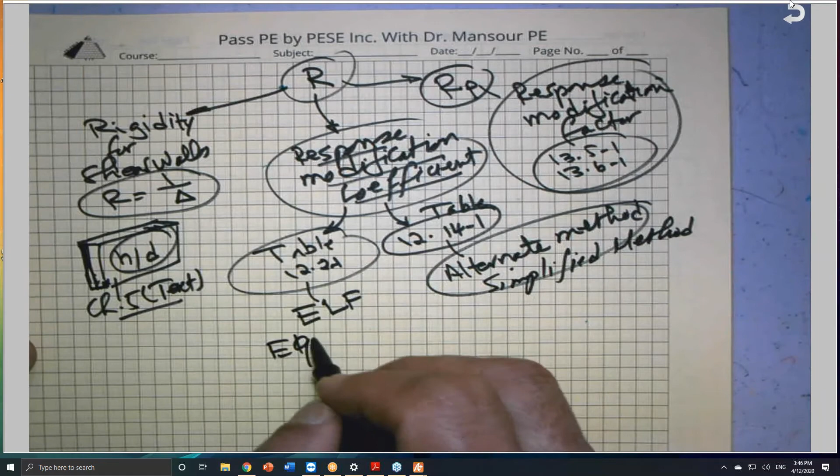And do you remember ELF? Equivalent lateral force procedure. This is the alternate method, or sometimes we call it simplified method, and this is the equivalent lateral force procedure. Okay, so here the R is given as the relative rigidities of the walls. We use relative rigidities because we are distributing the seismic force in proportion. Everybody got it?

Answer, which answer? Problem number 50. The equations are still the same, by the way. YCR is equal to the sum of Ri Yi over the sum of Ri. XCR, and by practice you'll remember all these equations, is the sum of Ri Xi divided by the sum of Ri. Those are the two equations to get YCR and XCR.

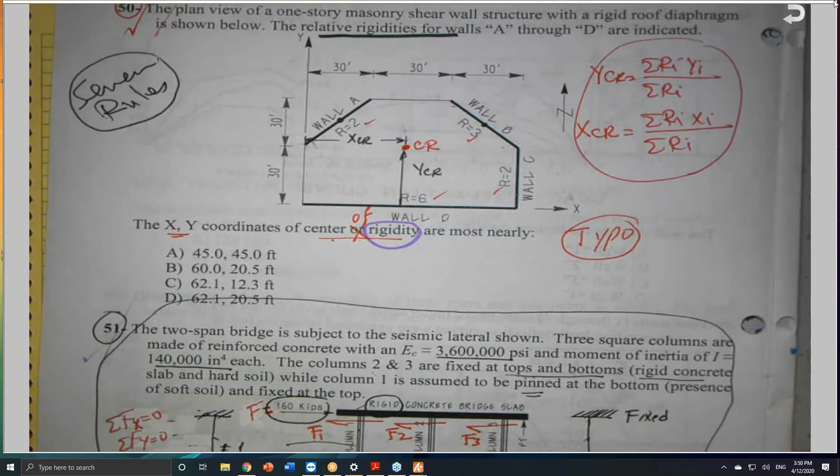Okay, this "of" here, please correct it, and I will correct it, and let's do it together. Unless somebody can give me the answer he got. I need an answer. Are you done? At least I know that all of you are thinking with me.

You are not thinking about the stock market tomorrow. Stock market will be fine, don't worry.

Okay, let's do it very quick. So YCR is equal to, this wall has nothing to do with it, no, it does, not X. This wall, yes, it does. So I'm summing moments here. So this wall is 6 times 0, divided by 6, plus this wall, okay, for YCR is 2

times what? Does this wall here, perpendicular to this, have anything to do with that? No. This wall does not control it; the center of rigidity will move this way in proportion to this rigidity and this rigidity and this rigidity. The center of rigidity goes up and down in proportion to these. So this wall has nothing to do with the location of the center of rigidity in this direction, but in this direction.

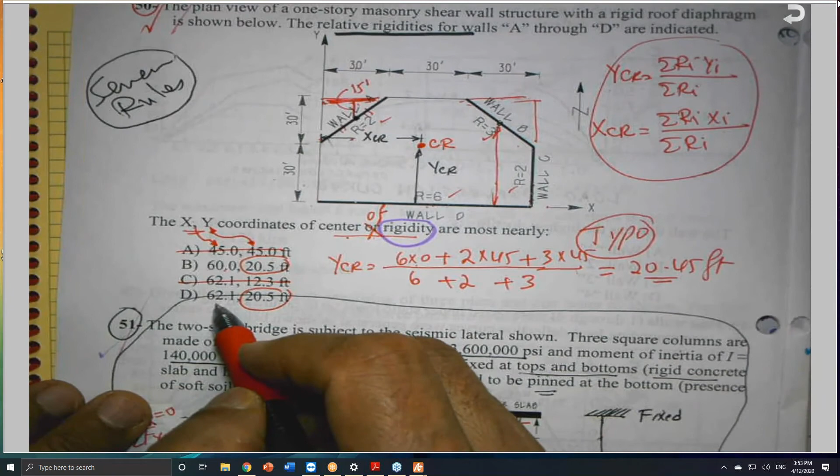As you can see here, for the Y, in the same order, by the way, be careful with the order. This is 20.5, and this 20.5. So I will exclude these two answers here. So I have 60 and 62.1. So this will be X sub CR, that now I'm summing moment about here.

So this wall, 2, times the whole distance, which is 90 feet, divided by 2, plus the same here for this 2, multiplied by 15, plus 3, let me add 2 here also, plus 3 times, this is 15 from 90, so it is 75, divided by 3. If you do this math, 2 times 90 plus 2 times 15 plus 3 times 75 divided by 7, this will give you a number.

Let us do it. So 2 enter 90 times, 2 enter 15 times plus, 3 enter 75 times plus, 7 divided, I got 62.14 feet, which is basically the answer D as in doctor.

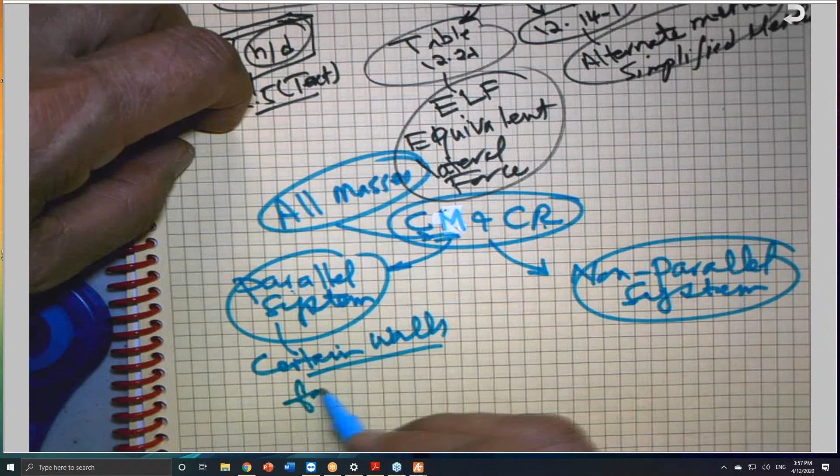But for the center of rigidity, for a parallel system, certain walls are used for the center of rigidity. And for the non-parallel system, also we could have certain walls, not all walls, certain walls for the center of rigidity determination. I need you to pay attention to this.

When you have a parallel system like this, I have a wall here, and I have another wall here, and I have a wall here, and I have a wall here. So when I set my coordinate system, X and Y, this is the center of rigidity, and this is the YCR, and this is the XCR.

Okay, when we have a non-parallel system like the situation we just solved, have a wall like this and a wall like this, have a wall like this, have a wall like this, and this is X and this is Y. Or a non-parallel system also, I believe I have another problem somewhere: this wall this way, and this wall this way, and this wall this way, and this wall this way.

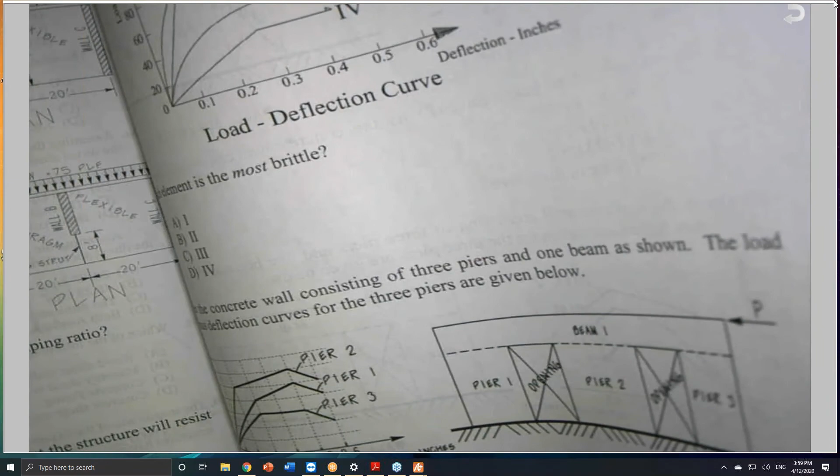Problem number 49. This is the load deflection curve. This is P, and this is delta, like the one I used for the spring stiffness illustration. And he is giving you 4 walls, 1 through 4, tested under static loads up to failure, and the corresponding load deflection curves were generated as shown. So it's asking which wall has the largest rigidity.

Rigidity R is 1 over delta. Who said that? This is in chapter 5. Can you go to chapter 5? Let me get it here. So the rigidity is the inverse of the... let me look for it. Here it is. On page 152 of the textbook, the R for the cantilever, assuming that the wall is fixed at one end and free at the other end, we call it RC, is 1 over delta C.

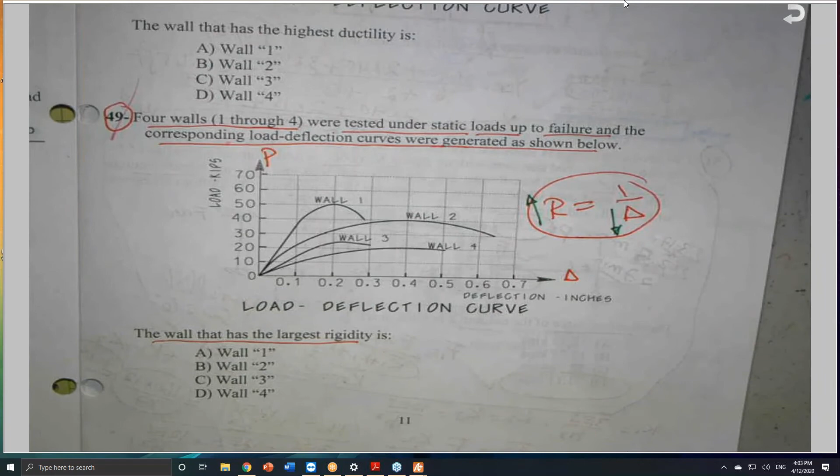So going back to this problem here. I needed you to be aware of that. The concept is very, very important. As this gets smaller, this gets larger. So either wall 1, 2, 3, or 4. Okay, what's the answer? This here has a smaller deflection. Wall number 1. Any question about that? Agree or disagree?

Largest rigidity. More rigid. You see the deflection here for wall number 2? Huge deflection. For number 4, huge deflection. This is the smallest deflection. And it has the steepest slope, by the way.

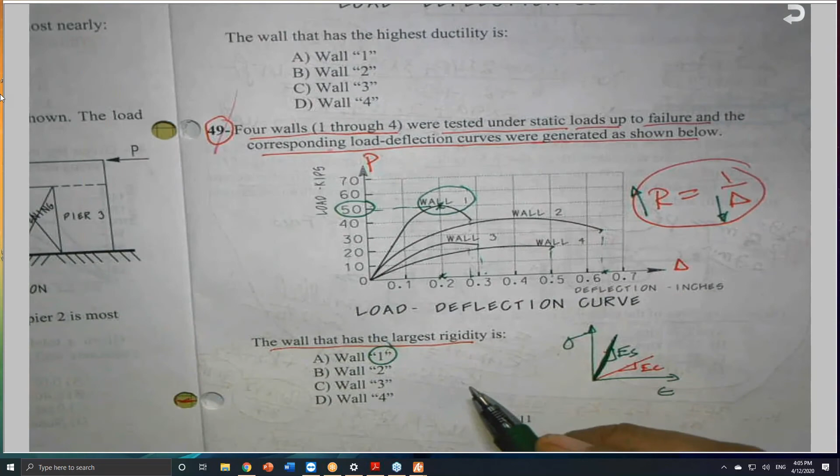So rigidity is the reciprocal of deflection, and look to see how much load, the peak load here, is needed in order to produce this deflection here, which is at the ultimate load. Here they carry less load and they produce a large deflection.

Let me grab a question from one of you, or a correction, or clarification, or disagreement. Wall 1, oh, you are telling me the answer. Thank you very much. I thought this was a disagreement.

What about problem number 48, which is the same, but he's asking which one has the largest ductility or the highest ductility. Ductility is the ability of the material to absorb energy. And ductility is basically the area under the stress strain curve up to failure, which we call modulus of toughness. Do you remember toughness? So the ductility is related to energy that can be absorbed.

That can be absorbed, which is the total area under the stress strain curve. Stress strain or load deflection curve, by the way. Which we call toughness, which is basically the area.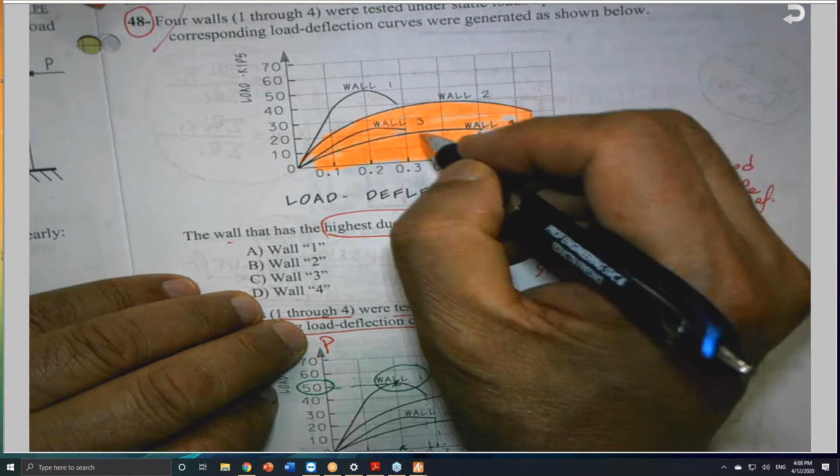If you look to the area for wall number 2, let me get a marker here. Wall number 2, if you look to the area under the load deflection curve for wall number 2, this is a measure for ductility. So if you compare this area with all other areas, for number 4, for example, or number 3, or number 1, obviously for wall number 2 it is the highest.

And this is why for problem number 48, the answer is wall number 2, which is answer B. Any question about that? Good, okay. If you look to the other problems, this is problem number 47.

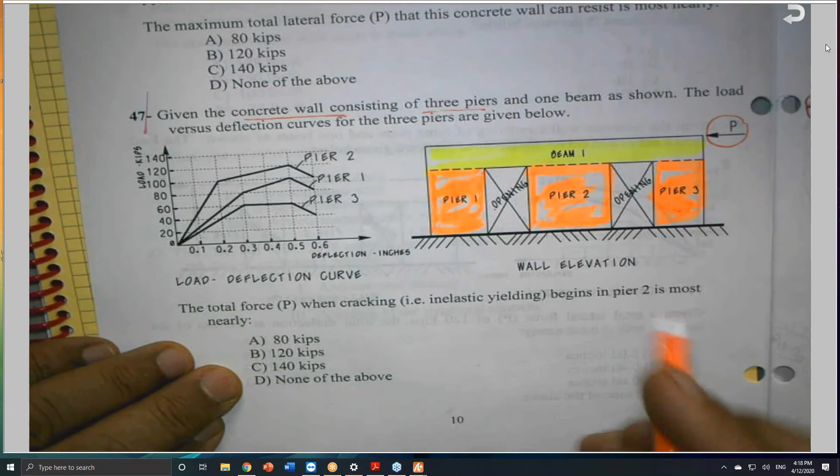So one of the methods is a simplified method where they told us to locate the piers, and the piers are the vertical elements between openings, and the horizontal we call them beams, or in this case we have only one beam. This is an opening and this is an opening, and there is a lateral force P, and you know the story. How can we determine that? By taking this as fixed, fixed, fixed, and they are parallel, and add them using H over D. This is called the approximate method of determining the R, the rigidity, for a wall with openings.

But here he gave us the load deflection curve for pier 1, pier 2 and pier 3. And they said, what is the total force when cracking and inelastic yielding begins in pier number 2? Here is pier number 2. This is the curve for pier number 2. What is inelastic? As you know, and I'll explain this also,

the stress strain curve or load deflection curve, P delta curve, when we have a linear portion, we call this the elastic stage, or elastic range. The moment I start to deviate from linearity, like this, the first deviation, this is inelastic, either a curve or a straight line. Inelastic.

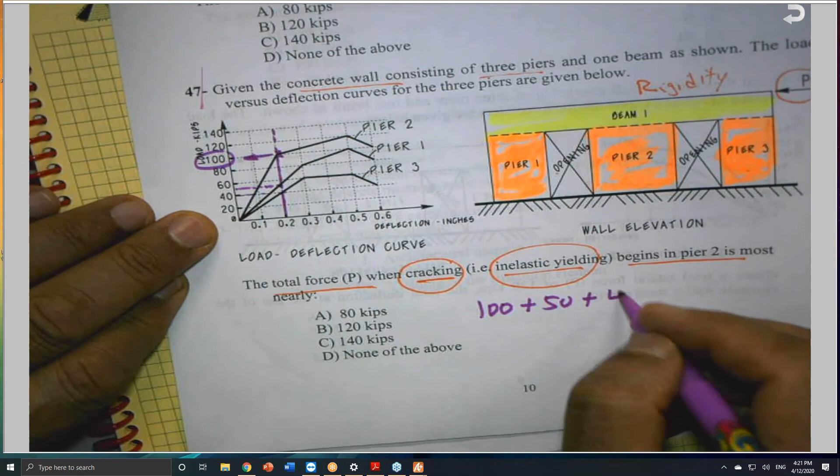When the cracking begins in pier number 2, this is 50 and this is 40. So my answer here is 190 kips. If this is the same number that everybody came up with, or if you disagree with me, don't take me to court, because if you take me to court, we are going to lose. So the answer is D.

And I know, none of the above. Sometimes I add none of the above not to challenge you, but to try to get your attention. I know the actual exam does not have none of the above.

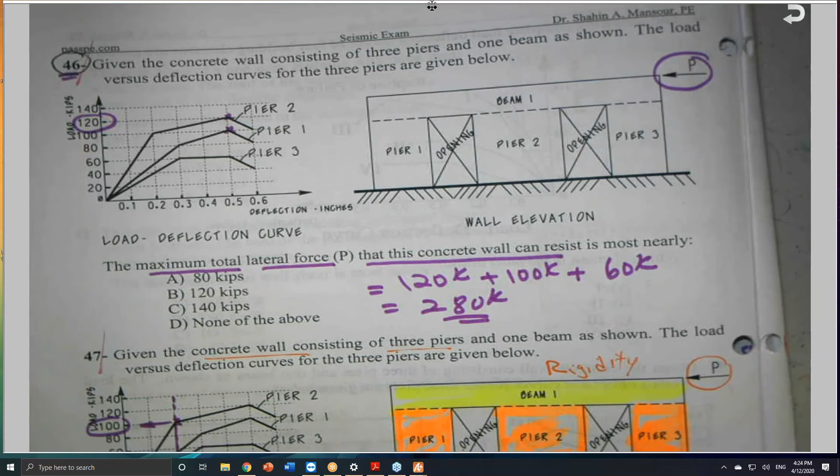What do you think? Again, oh my God, I'm repeating again, none of the above. Okay, but the 280 will be here. And I believe I have another variation of these problems. So the keyword is maximum, total. So I look at the load deflection curve and get the maximum load that can be carried.

Go to the previous problem, problem number 45. The same. He said that given the total load P is equal to 120 kips, the total deflection at the top of the concrete wall is most nearly. So if the load is given to be 120 kips, here it is. How much is the deflection in this case?

We know the stiffness K is equal to P over delta. Do you remember this equation? Which I told you, when we do this in the physics lab, the coil spring, you apply a load P, and you plot the P delta curve, and the slope is K, which is the stiffness, which is the rise over run, P over delta.

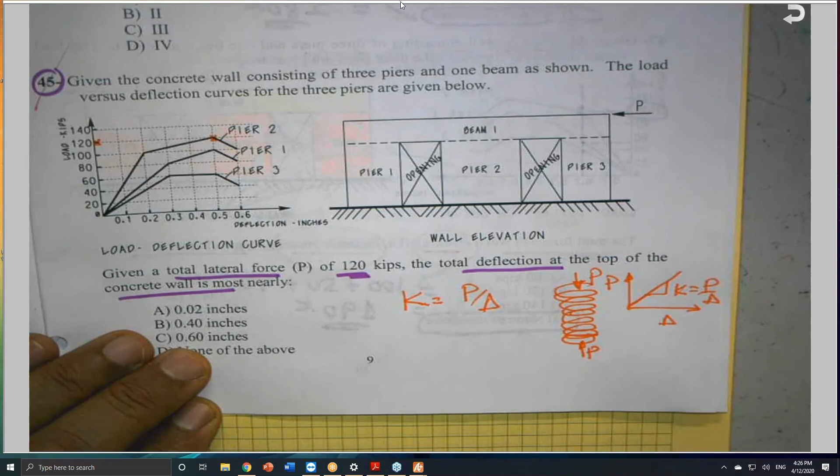So if I can get the K for each pier when the load is 120, that will be great. Any calculations here? I need to get K for pier number 1, K for pier number 2 and K for pier number 3. Can I do that? Remember, the K is calculated based on the linear portion of the elastic curve, of the stress strain curve or load deflection curve, which is this one here.

For pier number 2, at the top here, this is 100 and this is 0.2. So this is equal to 100 kips over 0.2, which is the slope of the line. You don't have to pick 100, you can pick 60, but it's much easier for me to pick 100, and this is 0.2. This is K2, by the way, sorry. And this is K1. For K1, I have here 80, and this is 0.3.

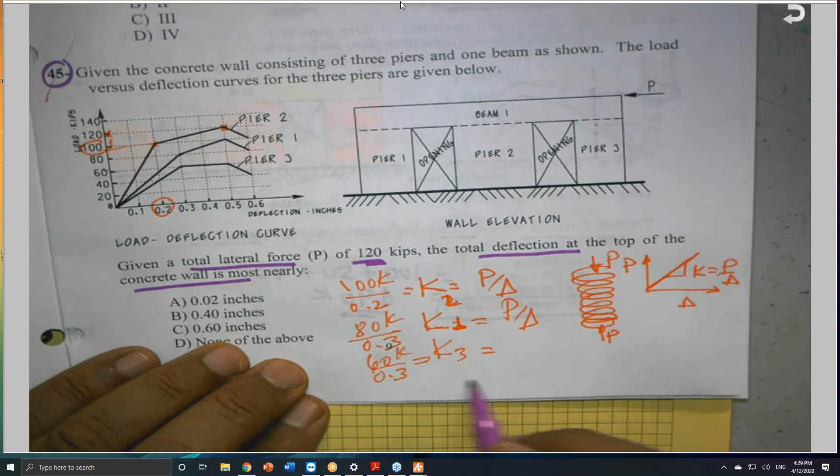And K3, here it is, I have 60 and I have 0.3. 60 and 0.3, which is the slope, which is P over delta, the one I explained before. If you are able to get K1 and K2 and K3, and these are in parallel, I can get the delta total for the entire wall as the load P, which is given to be 120, divided by the K total.

So for this one here, 100 divided by 0.2, which is 5 times, which is 500. This 80 over 0.3, which is 266.67. And finally, 60 over 0.3, which is 200 kip per inch. All these are kip per inch because these are inches.

So in this case, I can say that the total deflection is equal to 120 kip divided by the 500 plus 266.67 plus the 200, which is the same equation, but I'm solving for the delta instead of K. So in this case, the 500 enter, 266.67 plus, and 200 plus, inverse that, times 120, I got a small number.

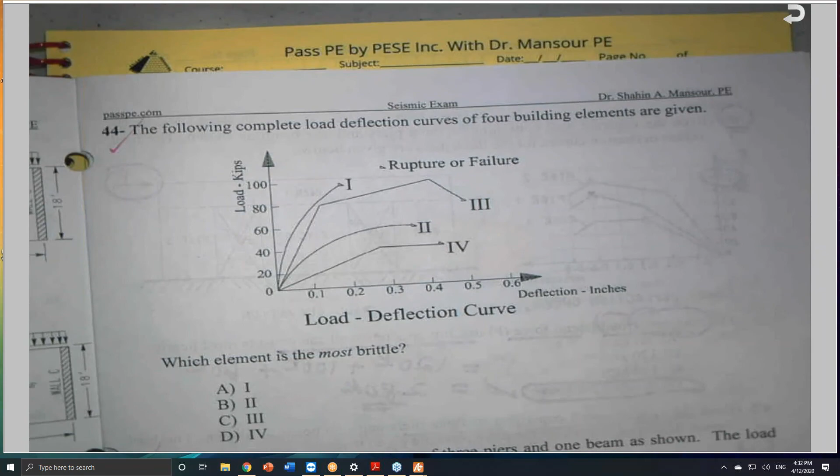Maybe next time I will, but you promised me this is the last time you are going to take the exam and you will be ready next time. I don't know when the exams will be offered again, but hopefully very soon. I know some of you may be out of state, some of you in state. It depends on each state, but I think this morning the president closed the entire country, a state of emergency, I don't know what it means. Because the cases are still rising and the number of deaths also still climbing, and I don't know when the country will open again. But if I were you, I would prepare myself as if the exam will be in the second quarter. I don't know if your application has been approved or not. And if your application is already processed and received the okay from the California board to take the exam, try to do your best. And

Let's conclude this by solving this problem here. This is an easy one. But I need you to go over this and say, oh, why did we do it that way? Why did we do it that way? I need you to understand all these things, please, because as I told you, for the last 30 years, I'm doing all my best to make the subject easy and interesting.

And again, the teaching at school probably helped me a lot. That's why I'm different from many vendors. I respect all of them. Maybe they are better than me, but I still believe in teaching, and I still believe in presenting the material a little bit different from other vendors, not to show you how to pass and that's it. No, I'm showing you the concept, because I believe if you understand the concept it will last with you for a long time, and you can come back easily. By the way, we forget. I cannot deny that we forget.

So what is the answer for the last question here? So we can conclude that. And too many problems, and again, the exams normally don't have these problems directly like the one I have here. But believe me, those who bought my books and used them and studied on their own did best, just studying without taking any course. But you are lucky that, again, materials.

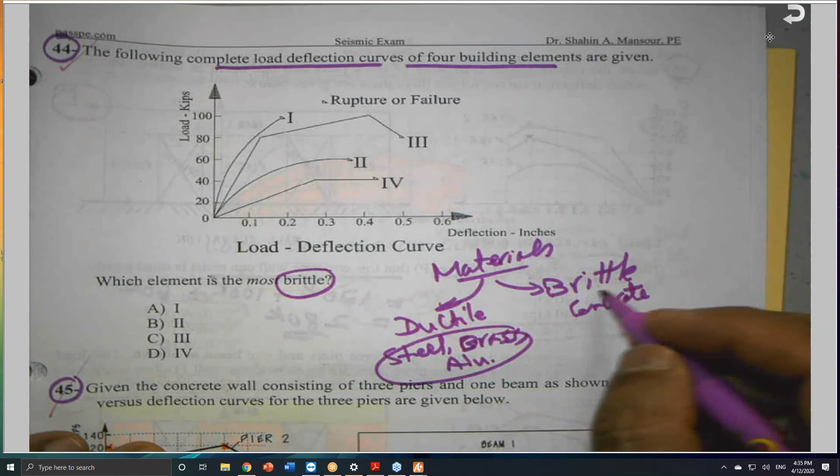One way we classify materials is as ductile and brittle. Ductile and brittle. Ductile like steel, steel, brass, aluminum, with variation of ductility among them, but they are considered ductile. Brittle like concrete, cast iron, chalk, for example. A piece of chalk is very brittle.

Confinement and continuity. So here is one: what is the most brittle? The brittle material, like concrete or chalk, is the material that will fail with minimum or small deformation or a small deflection. If you look at element number 1, element number 2, element number 3, element number 4, you will find that this is a very brittle one. The ductile one is the one that can deform more: ductility. And there is something called ductility ratio, by the way, or ductility factor.

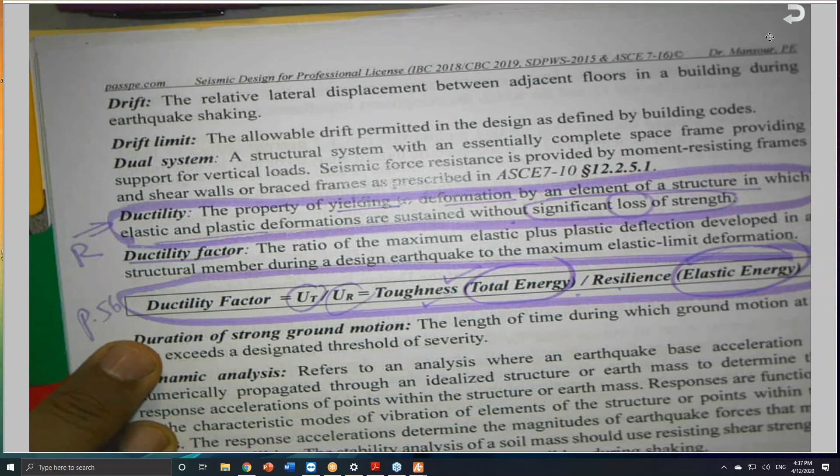Ductility is ductile. And this is the whole code, by the way. The seismic codes, since they started to develop, always look for how we can improve the ductility of the structure. Because the more ductile, the more energy can be absorbed, the more resistance to seismic force. And this is why the answer is A, which is element number 1, which is a more brittle material, as indicated here.

Makes sense. Okay. So let me stop here, and I'm so glad that I survived with you guys, because as I told you, last night I didn't sleep, and I was teaching this morning also for transportation. But I'm glad that I survived all the way until now. What time is this? 4:30 or 4:38? That's good enough.

So please do your best, always communicate with me, and solve all the rest of the problems. I was hoping that I could catch these two problems, 40 and 41, on the drag force, maximum drag force, which sometimes cause a little bit of confusion. I explained the drag force more than once. So please go over these problems and always challenge yourself by solving the questions as if you never saw them before, even if you remember the question. Try to be always ready by assuming that you know nothing about this problem, or you have never seen it.